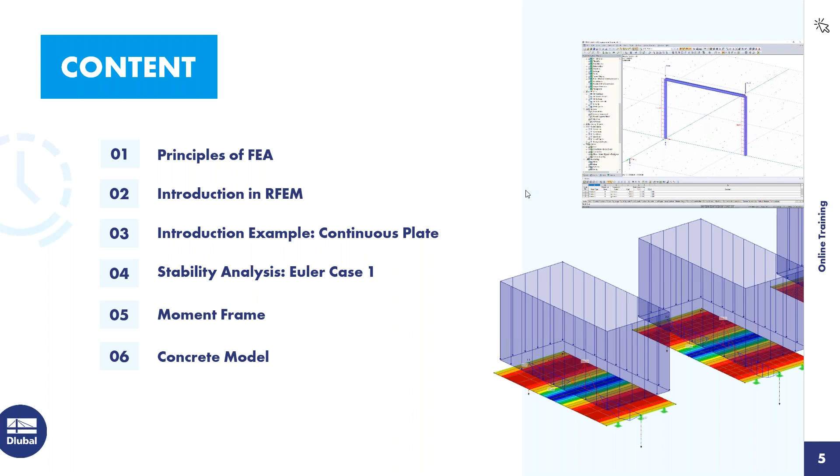So now we can dive right into the first subject, which is the basics of FEA software. When using computer software like FEA software, it is mostly and usually based on the displacement method. Another method you may be aware of is the force method, where the unknown is the force and the internal forces need to be calculated. With the displacement method, the unknown is the displacement. So to solve for this, the displacement vectors must be calculated, and then the internal forces and support reactions can be determined. The main problem today is an analytical solution can be difficult to determine with large complicated structures. So doing hand calculations for some structures with complicated and odd geometry can almost be impossible, or feel like it's impossible. The limits are being reached with large complicated structures, and it's difficult to get accurate results.

And so this is where FEA software comes in. Structures can now be modeled and converted into a finite interconnected element mesh. The material and cross-section properties are then determined or given at each FE mesh node, and the mechanical behavior is transferred between these elements. Discretization is a word that I would like you to walk away with, and this is the act of structures being submeshed into finite elements, which is done in FEA software.

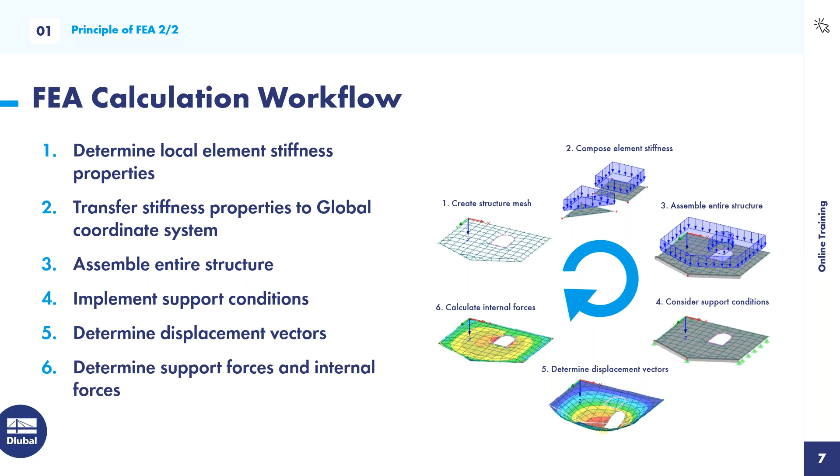So now we can move on to our example. For this example, you can see a couple of continuous plates, and then we are going to compare the moments between these plates with the continuous beam on the end, so we can get an idea of how the calculation differs between those.

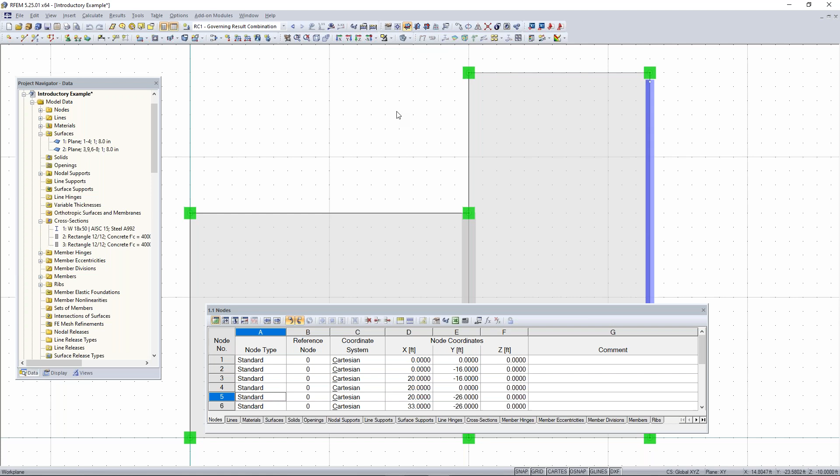We can also change the view of the model. If we go up here, you can see in this category of the toolbar we have views in the X direction, the Y direction, and the Z direction. We can also change these into the reverse direction, so if we want an elevation view of our model or a top-down view, we can choose these views.

In the project navigator, at the bottom here, we have a folder called add-on modules. RFEM is great for viewing things like internal forces, but if you want to design your structure or elements of it, you'll need to use add-on modules, which all come included with every student version of RFEM. You can play around with these; they're organized for design of different materials. You can also find the add-on modules up here in the toolbar, organized again based on design.

Next, in the project navigator, we have our display tab. This basically allows you to turn aspects on and off within RFEM. For example, we can turn off our surfaces, which just turns off the rendering and display—the surfaces are still there in the analysis, but you can turn them on and off visually. Everything is organized based on these expandable and collapsible folders, so things like loads and results can also be turned on and off.

The next tab we have is our views tab. We can create a visibility by turning visibilities on. Right now I have my members by cross-section checked, so if I turn this visibility on, only members with a cross-section of 12 by 12 will be shown—that's my beam member right here. If I turn that off, everything is turned off within my model.

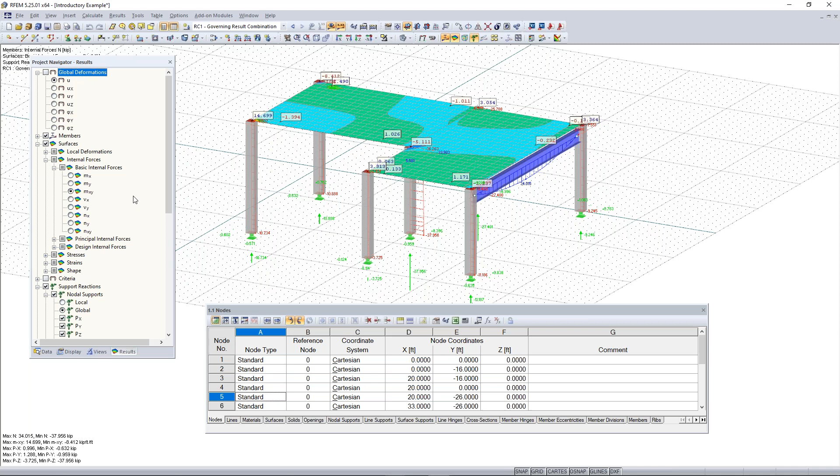The next tab, if I turn off my visibilities, is the results tab, and this is the last tab in the project navigator. If I turn on my results, the results tab will pop up here, organized similarly to the display and data tab. I'm not going to go into results in detail right now, but we will later in other examples. So I'm going to turn these off.

The last thing to go over before we hop into our example is how to navigate through RFEM. You can click the scroll wheel button to move your model around, use the scroll wheel to zoom in and out, and hold Control and click the scroll wheel to rotate the model. If you don't have a scroll wheel, you can go to the Move, Zoom, and Rotate tool—click on that, then left click to move, hold shift and left click to zoom in and out, and hold control to rotate. You can also do all of this with the arrow keys on your keyboard, which perform the same function.

Now we can open our new model to start modeling our continuous plate example. First, let's go up to the new model button—this is a way to create a new model, or you can go to File and click New. We'll go to the model name field; each model needs a name, so we'll name this 'continuous plate example.' You can also enter a description for your model, though it isn't needed—it's just an option.

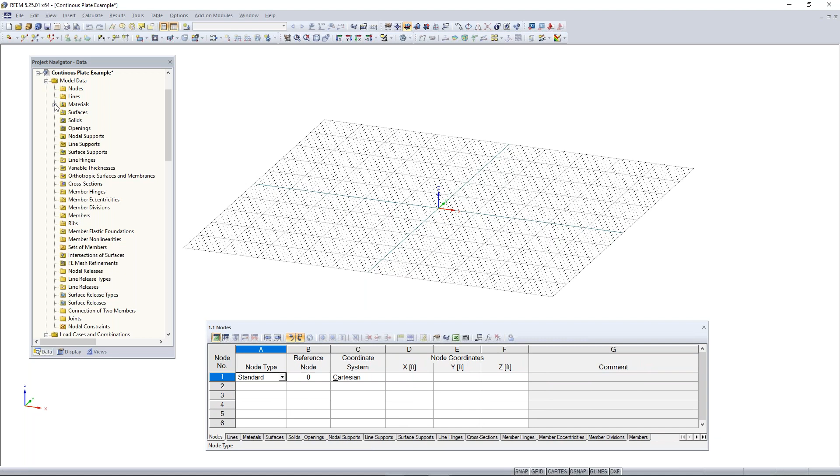The first thing you'll notice when I open my new model is my work window is blank, and my grid is here in the work window, blank and lying in the XY plane. My tables are all blank as well. Some materials have come over from previous models, but we'll delete those. The first thing we might want to do before we start with our model is take a look at our grid and make sure it's set correctly. So we have our grid points here, all distance and spaced by 1 foot, and we have about 50 points in each direction.

If we want to change the settings of our grid or work plane, we can go up here to this button and click on it, and you can see here we have our work plane settings. Everything up here we don't need to really worry about; this is if you want to change the plane that your work plane sits in, so we'll just keep it as the XY plane and model there. Over on the right hand side, we have 50 grid points in each direction, positive and negative, and we'll leave this as default. The spacing for each grid point we are also going to leave as 1 foot. So everything here is okay for now for this example.

So we'll click OK, and now we can begin with modeling our concrete plate. To model a 2D surface in RFEM is pretty simple. All we need to do is either go to the Insert menu up here, then Model Data, then Surfaces, and you can see we have a lot of different surfaces to choose from. We're just going to choose Plane, and then Graphically, and then choose a rectangular surface, since our plate today is going to be a rectangular surface. Or instead of going through this menu, we can simply go to our toolbar up here and locate the new rectangular surface toolbar button, which looks like this, and we can click on it.

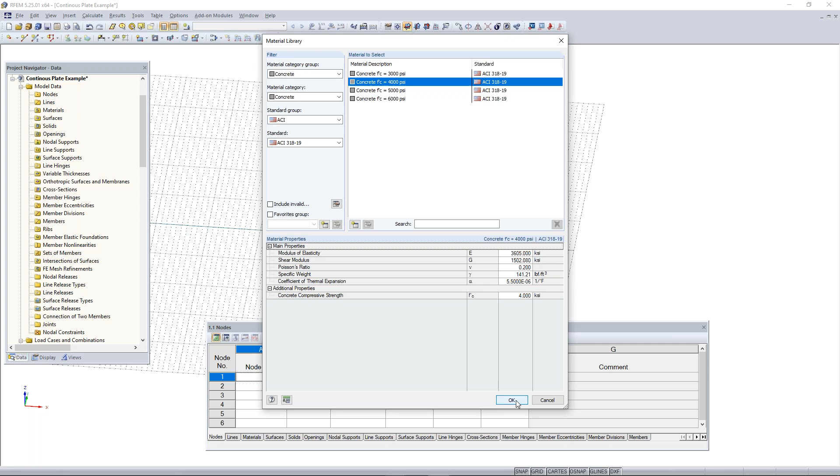Now we have our material chosen, so all we need to do is tell the program how thick we want this material to be. By default, for imperial units, 8 inches is selected. We want to increase this to 12 inches for these plates.

Then we can click OK, and now we can draw our plate. You'll see my cursor has turned into this reticle-looking cursor, and I also have the coordinates right next to it telling me where I'm located along my XY grid plane.

So I'm going to choose the origin, and then draw a 32 by 16 foot plate. All I need to do is move over horizontally 32 feet, and then move up 16 feet in the vertical direction, and then left click.

Left click at the origin, and then left click a second time to mark that second point. Then I can right click, and once I right click, that will cancel out of the tool. You can also hit escape if you like to cancel out of a tool.

Now you see we have our plate here, or our rectangular concrete surface. The rendering in RFEM is just simply a 2D element with boundary lines defined, but in the calculation the stiffness will be taken as 12 inches thick, so no need to worry about the rendering. This boundary line is always located at the center of the surface, so there will technically be 6 inches on one side and 6 inches on the other side.

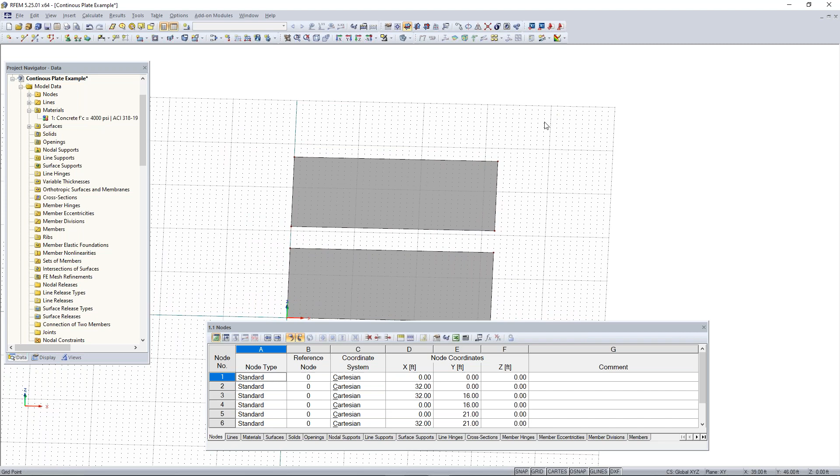Let's say I already have this surface here and I need to just duplicate it. I can simply select this second plate here by highlighting it from right to left or left to right. Then I can use the tool up here called Move and/or Copy.

This tool allows me to make one copy of the element that I selected, and then I just need to tell it which way to displace it within the plane. I can either enter those displacement vectors, or I can use this graphics tool by clicking this button, and then simply move this plate.

I'll choose my bottom point here, and then I want this bottom point to move 5 feet above where this plate is located, so that'll be this next point. I'll hit OK, and now I've made one copy of this plate and moved it that much more in the Y direction. So now we have all three of our plates here.

Since my grid is only 50 feet by 50 feet, I'm just going to highlight all of my plates here, left click, and then I can move my plates down into more of the center of my grid.

Next thing we want to do is model our beam. So what I'm going to do is create a new cross section or create a new member. To create a new member, we can either go through the insert menu or choose the button here, new single member. So I'm going to click on new single member.

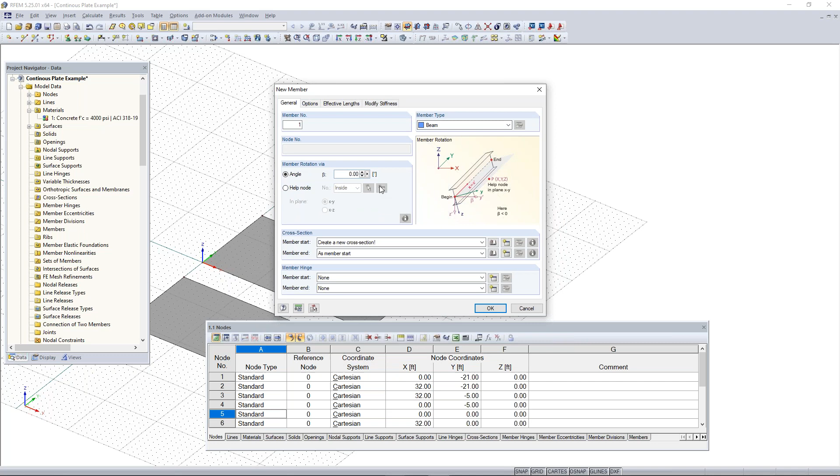Under new single member, I'm going to go to the cross-section library. This is the new single member dialog box, kind of similar to the surfaces dialog box, where we can choose our member type. For beams and columns, we want the member type beam. Then for our cross-section, we can choose the cross-section start.

We can either create a new cross-section or go to the cross-section library to choose from a predetermined cross-section shape, so I'm going to click on the cross-section library. Once that pops up, you can see our cross-section library is organized by rolled and built-up sections based on a standard. Then we have our parametric thin-walled sections, which are parametric, so you can choose the dimensions manually for each of these.

We have parametric massive, which are usually used for concrete, and parametric timber, which you can again use for timber and choose the dimensions for. Since we're using concrete for these plates here, and they're rectangular in shape, we're going to use the rectangular cross section.

Then you'll see the rectangular cross section parametric window pop up, and then we can change our parameters. So we can make the base 40 inches, and then the height we can make 12 inches.

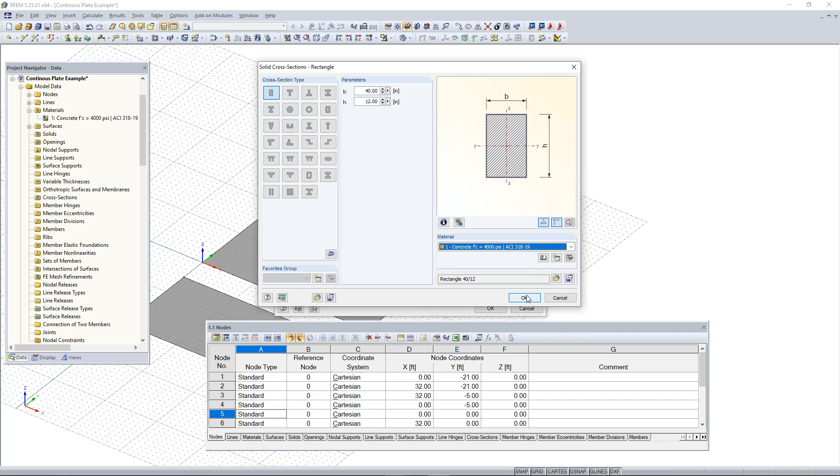Now that we have our dimensions in, we can choose our material, just like the surface. Since we already defined this concrete 4000 PSI material, we can just simply use that instead of having to go into our material library again. So we can click OK, and then click OK out of that box.

I'm just going to draw this continuous beam 5 feet above this plate, so it resembles this plate, and then we can easily compare it in results later on.

Once I draw my beam here, you can see that the rendering looks like this rectangular shape. If I change my model from a solid transparent display to a wireframe display, you can see that all members drawn in RFEM are simply 1D elements, and that's how they are calculated in the background. The shape you see is just a render over that 1D element, and all that's used is the cross-section properties and material properties to calculate the results on this member.

You can also see that our surfaces are also just made out of these 4 boundary lines, and this dotted line shows you that there is a surface made up here. Again, we can use this button up here to change the rendering of our model, and then we can move on with dividing up our lines here and adding some supports to our model.

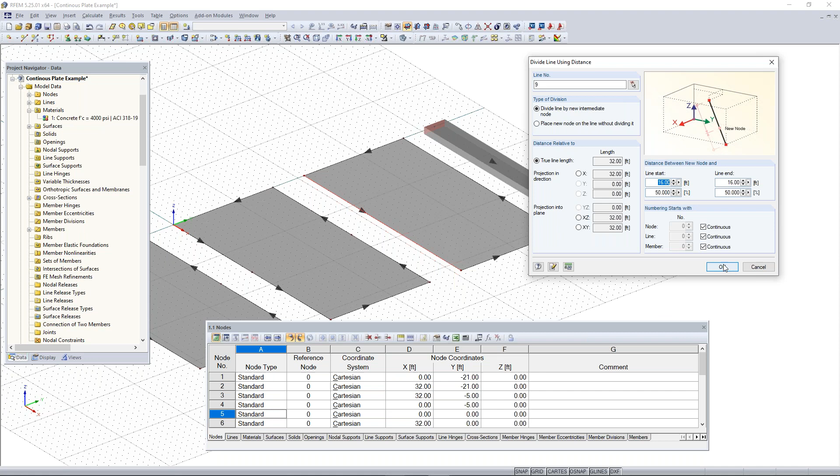We want to use the true line length, and divide this line by a new intermediate node. I'll click OK, and you can see it's divided halfway through. I can do the same thing for this last one.

Now what I need to do is divide this member as well. I can just do that using a distance halfway through, and I'll click OK.

Now what we need to do is add supports to the rest of these plates, and we need to add line supports to the center of these plates. So what I have to do is add in a line, by going up to the new line tool.

Then I can draw my line, and you can see my cursor snaps to these nodes here. So I'm going to snap to this node and then to this last node.

Then I can exit out of that tool, and instead of drawing the rest of these, I can use this powerful function where I click and select a line. Whenever you click and select something, you can hold Control and then left-click and drag, and that allows you to make a copy and drag that element wherever you want. So I'll left click, hold Control, and drag this line again to the last plate.

Now we can add in our line supports. Within RFEM, there are two different supports: nodal supports for single points, and line supports to support the entire length of a line. So I'm going to go up here to the button New Line Support.

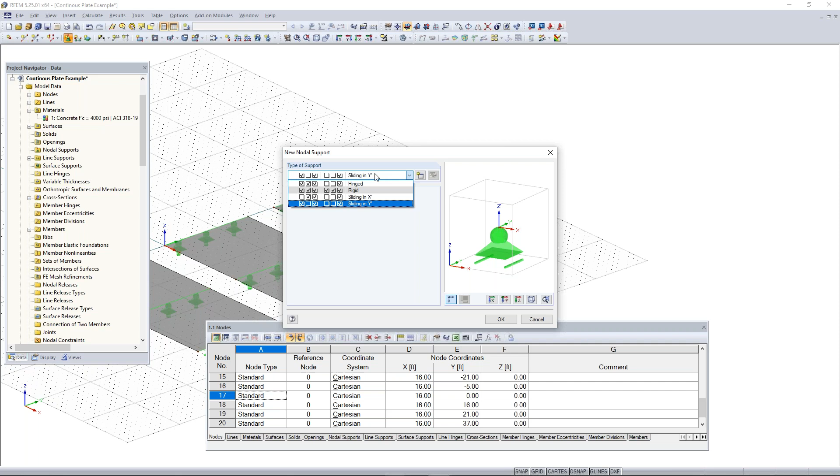For the first two supports, they're going to be hinge supports, so I'm going to choose hinged and select my two nodes here. But for the last support, we need to make this a different type of support and change the definition, so I want to create a new nodal support.

Under the new nodal support dialog box, you can see we have mostly just our support conditions here for defining our support. For this one, we want all 3 degrees of translation in the X, Y, and Z directions to be fixed. But for rotation, we want to fix the rotation about the x-axis.

The reason for this is because if we had all 3 of these supports on this beam simply as hinge supports, the beam would be able to rotate infinitely about its x-axis, causing an instability within the program. So we need one of these supports to lock the rotation about the local x-axis.

If I right click on this beam, I can show the local x-axis system by right clicking and going to the shortcut menu, then to the local axis system. Now you can see the x-axis as well. I'll right click and turn that off.

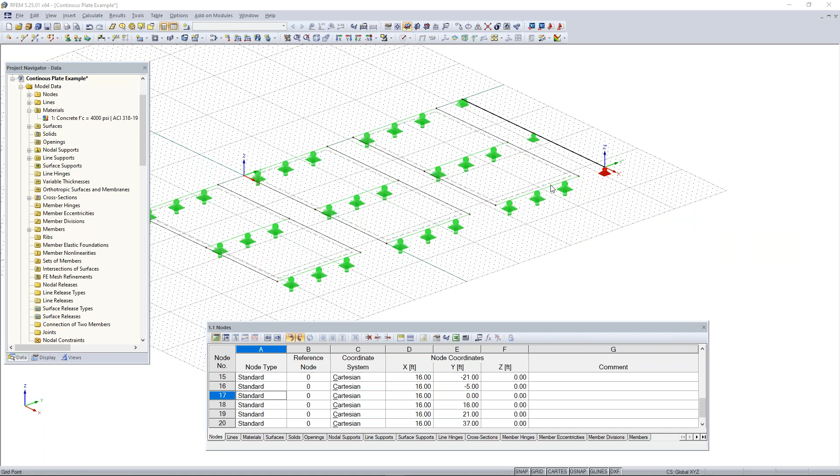Now that we have our model fully entered and all the model data created, what we need to do now is add in the loading, now that we have our supports.

To add loading in RFEM, the first thing you need to do is create a load case to assign that loading to. So we go up here to this button, new load case. Once I click on that, the edit load cases and combinations dialog box pops up. You'll see that we clicked new load case, and RFEM automatically created this first load case and assigned the action category dead to it.

What we need to do now is enter a description. We'll name this description load case 1, since we're not designing this according to any standard and the action category isn't too important right now. You can see self weight is automatically turned on for dead load. For this example, we don't want self weight activated, so I can uncheck that option. You can see the -1 in the z direction for the factor and direction is applied, which basically multiplies this factor by the self weight of the model in the downward direction to simulate gravity. We'll turn this off for now and click OK.

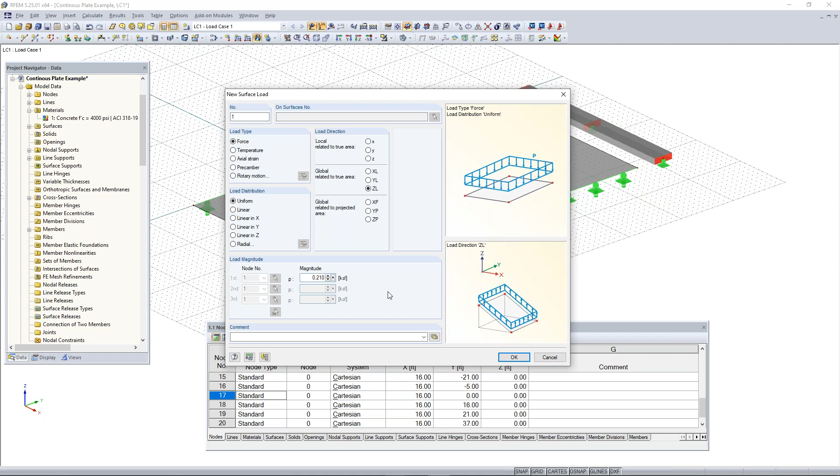For the load direction, we're going to choose the global Z direction. And then for the magnitude, we can make it simply 0.210 KSF. What we can do now is click OK.

You'll see my cursor is going to look a little different, telling me that now I can graphically select where I want to apply this loading. So I'm going to left click on my plates here. You can see that my loading is actually for gravity loads in the wrong direction, so what I can do is right click to cancel out of that load tool, and then I can just move and rotate my model.

I can drag from right to left to select my loads, select all of them, double click them, and then all I need to do to flip the direction is add in a negative sign. I can click OK, and then rotate my model back, and you can see my loading has been added.

I can also turn off this grid in the background now that we're done with modeling, to get a cleaner look. Down here are buttons used to turn off certain functions like snap and grid. You can also change your grid to a polar grid, but we'll keep it as Cartesian. You can turn off other things like guidelines as well, so we'll just turn off the grid, and now we have a cleaner look, better for presenting.

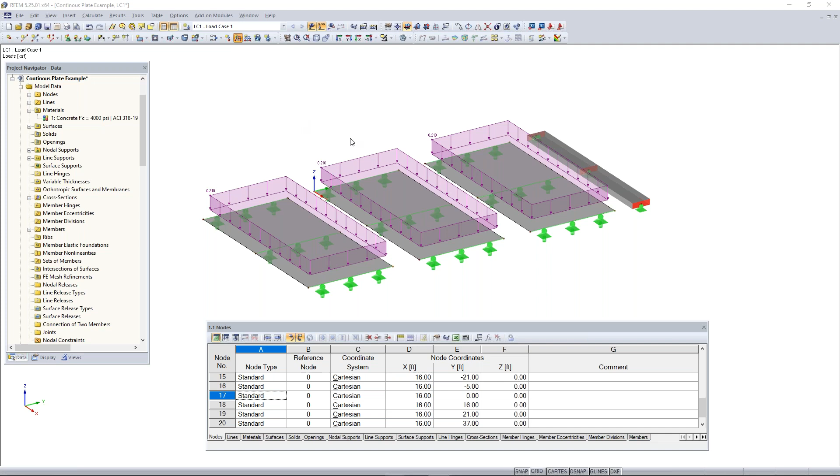This member loading is going to be the same as the uniform load or surface load applied here, just converted into a linear load. We'll keep the load type as force, and it's going to be uniform. Direction is going to be a gravity load, so global Z direction, we'll keep that the same as well. Then all we need to do is enter our magnitude, which is going to be 0.210 kip per feet - basically 210 pounds per feet.

We'll click OK. Really, we're just keeping these loads the same so we can then compare our results and see the difference between our beam here and our plates. So I'm going to change this to negative.

Now we can add in or edit our FE mesh. FE mesh for members is not too important, but FE mesh for surface elements within RFEM is pretty important - this is what you need to look out for. What we can do is go up here to calculate, and we can see what the global FE mesh looks like when we hit generate FE mesh. You don't have to do this before any calculation, but for example purposes I wanted to show you what the FE mesh looks like.

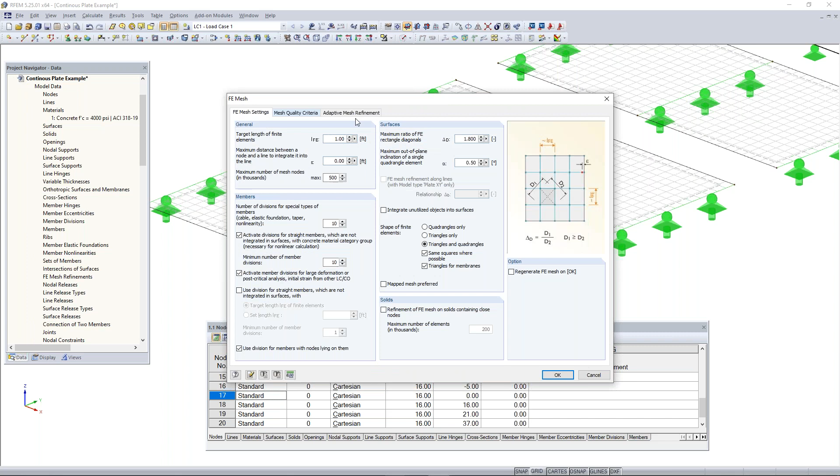It's easier to view if I turn this into a wireframe view since it's gray on gray, but you can see this is what each FE mesh element looks like on our surfaces here. If I go to calculate and then FE mesh settings, by default the FE mesh in imperial units has a target finite element length of 1 foot for each mesh element. This actually looks pretty good on our surfaces here, but for example purposes, if we needed to refine our FE mesh for certain elements, you can do this.

So what I'm going to do is add an FE mesh refinement to each of these surfaces with different lengths. I'm going to turn off the global FE mesh for now, then right click on the first surface here, turn this back into a solid transparent view, right click on the first surface, and go to FE mesh refinement, then new.

Once I do this, it's asking me to create a new FE mesh refinement definition. I'll click create new FE mesh refinement, go to surface, and make the target FE length of this refinement 0.2 feet. The global FE mesh in RFEM was 1 foot. If I need better accuracy on a smaller surface, I can shrink the FE mesh length to 0.2 feet. We'll do that for this first surface.

Now we'll do the same thing for the other two surfaces and increase the FE mesh length to see what that looks like. So we'll right click on the second surface, go to new FE mesh refinement, create a new one, and instead of 0.2 feet, we'll make this one 0.4.

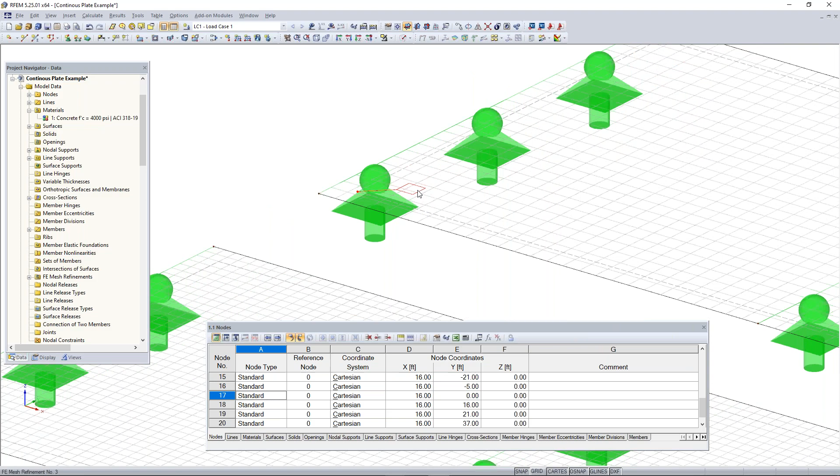Now if I go to the calculate menu and select generate FE mesh, then switch to a wireframe view and display the FE mesh, you can see this little symbol on our surface telling us we have an FE mesh refinement there, and those symbols are the same shape, easily showing the FE mesh length of the refinement. You can see the difference in FE mesh length between these plates, from 0.2 feet to 0.4 feet to 0.6 feet, giving an example of how FE mesh lengths can change across different plates.

So the next thing to go over would be the sections. We need to add some sections to our plates here.

To add section cuts, which allow us to take a cut down any section to view our results along that plane, I go up to the button define section, and hit the drop down arrow next to it for more options. I can create a section numerically, and I'll name this section AA. Once the section name is in, I want the section to go through the surface, using the via plane section type.

I can either type in the coordinates for point A to point B, or simply select them graphically using this button. We want this section cut to go directly through the center of our plate here. Next we need to choose which plane the section cut will be located in. The local positive Z axis is good, that's the local Z axis of the plate. Since it's lowercase, you can also choose the global axis system as well.

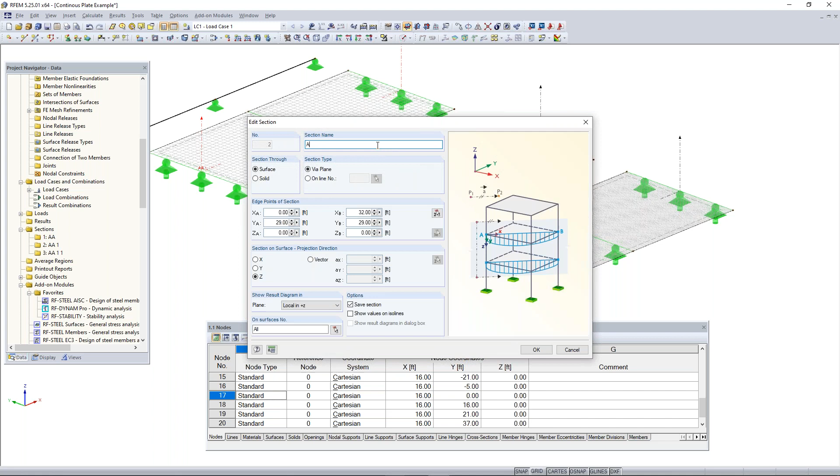Then I can change the names of these section cuts. Right now this one's AA, but these others have odd names. So I can go into my project navigator, go to my sections folder, and expand that to see the names. I can double click on one to change its name from AA to AB, and change this third one to AC, then click OK.

And then I now have my section cuts, and I'm going to turn this back into a solid transparent view. Now basically everything is ready for calculation. So I'll run the calculation, and then I think this is a good point to take a 5-minute break.

But before we do that, we can go over any questions that might be in the chat that were asked before the break here. So we can go over those and then we can go through the break.

Hi Alex, we just had a couple questions related to both the presentation as well as the model. The first common question is if the presentation today will be recorded. Yeah, the presentation today is recorded, and once everything's over and the recording is rendered, we can send it out to everyone, and you should expect that within the next day or two.

Another question is if it's possible to generate the load combinations according to a specific standard. Yeah, so if I go back to RFEM, when you're creating your model, if you want to generate your load combinations automatically when you create your first model, under the general data dialog box here, you can enter everything, and then in this little section here, you can choose from a list of standards. So we have the American standard, Canadian standard, and Eurocode. And once you choose your standard, there's an option here to create your combinations automatically based on that standard.

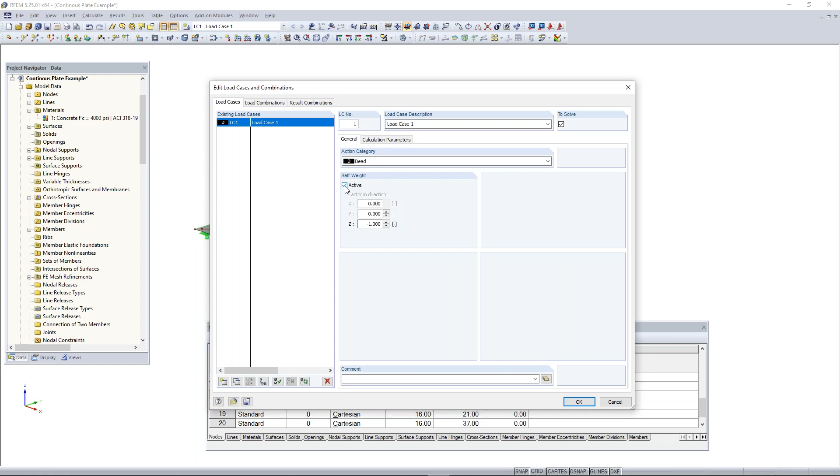But if I wanted to do that for the load case, I would just go to it and then go to activate, and this will activate your self-weight for that specific load case. If I click OK, the self-weight is now activated. If you wanted to see a graphical representation of the self-weight, or are curious how that worked, you can go to the display tab in the navigator, go to the loads section, turn on your loads, and then turn on your self-weight loading. So that's normally hidden, but if you wanted to view what the loading of the self-weight looks like, you can see that there as well.

Perfect, okay, that's all the questions for this first portion. All right, awesome, thanks Amy.

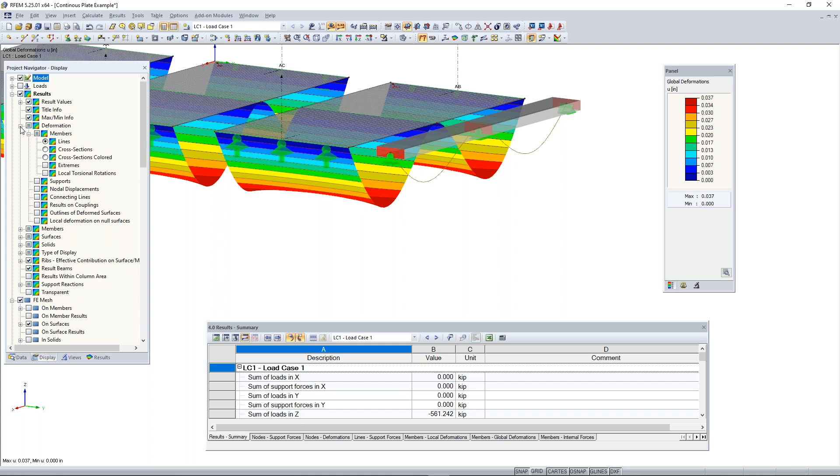But if I want to have this color coded as well, with a colored cross section, I can go to display, then go into the results here, and under results we want to expand deformations and then expand members, and I can turn on colored cross sections. Then you can see the rendered colored cross section deflection shape of our member shown as well.

Just giving a better visual of what that looks like, and you can see it's basically almost the same as the deflection for our plates. We're going to go over comparing these results in just a little bit. Then the next thing we can view, if we turn off our deformations, is the results on our single member here.

So if I check on members and then under internal forces, I can check off the option to view our axial forces. We can also view our shear forces.

VZ is for shear in the local Z axis. So if I right click and turn on the local axis system here, you can see the local axis, so we have our Z direction. This is the shear in the local Z direction. If I turn this in the wireframe view, we can get a nice look at what that shear diagram looks like as well. So that's good.

The next thing we can also view is our moments about the local Y axis. We can take a look at what that moment diagram looks like as well. Looks like we get a max moment here of negative 21 kip feet.

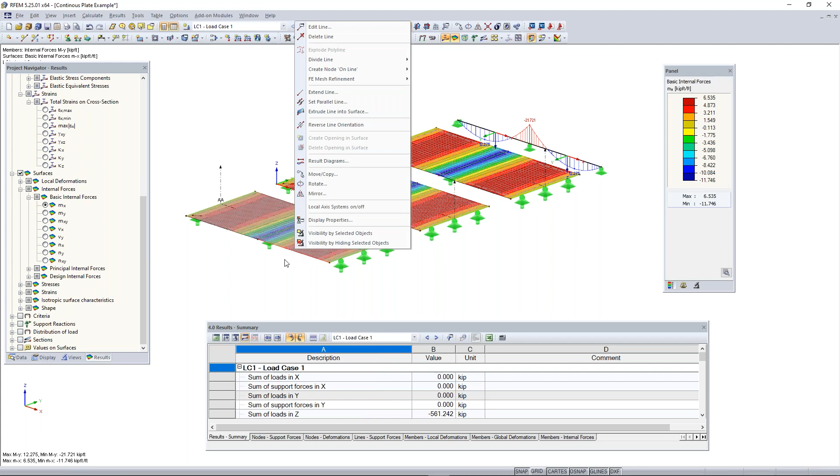By right-clicking on it and then turning on the local axis system for all surfaces, you can see what that axis system looks like. It's a little similar to the member axis system. So these are the moments along that X axis, and you can see again that it is color-coded. This panel on the right-hand side will give you your max and minimum results and that color coding as well.

You can also take a look at shear on our surfaces here, so this is shear along the X. Then we can take a look at our NX, or our N forces, our axial forces on our surface. We don't have any right now because there are no forces in that direction.

The next thing we can also look at is our support reaction. If we go down here to support reactions, I can turn that on and you'll see what those look like. The line support reactions are a little more complicated, but this is just the forces or reactions along the line here, so it's going to be a uniform reaction there.

Then we have our point forces on our nodal supports down here. We can take a look at what those reactions look like, and then we can also take a look at what our moment reactions look like as well in the Z direction.

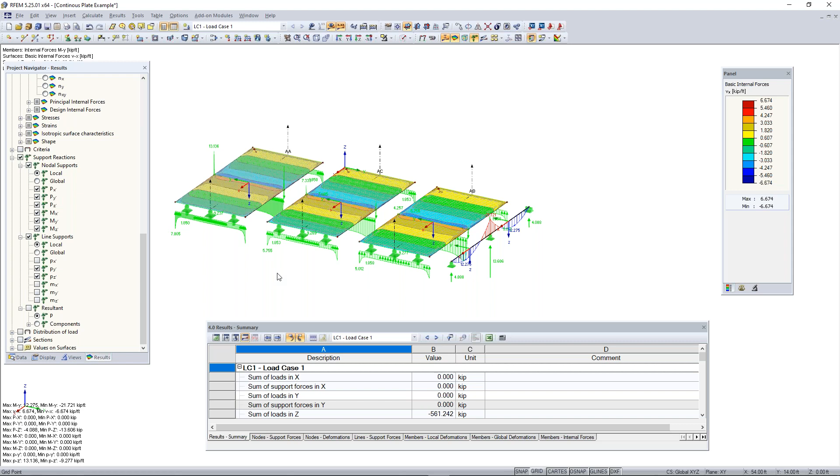So we can get a look and take a look at all of those moment reactions. And then the next thing we can take a look at is values on surface. So we can turn on or turn off our support reactions now to get a better view of the values, and we can show basically the extreme values on our surface to take a look at those forces in the surface as well.

Now that we've gone over the results, we can take a better look at the results and activate the section cuts here. So now that we added these section cuts along our surface, we can turn those on. And now we can basically see what the shear of the surfaces are with a shear diagram and that section cut plane. So right now, you can maybe get a better look at how those results differ in accuracy between these different plates here.

So that all depends on the FE mesh size, and you can see the accuracy increases the smaller your FE mesh gets. So right now we're looking at negative or max shear force in the center of our plate of negative 3.397, and this was for the surface with the smaller FE mesh. And then you can see how that changes by just a little bit, so negative 3.397 and then negative 3.398, depending on the size of your FE mesh.

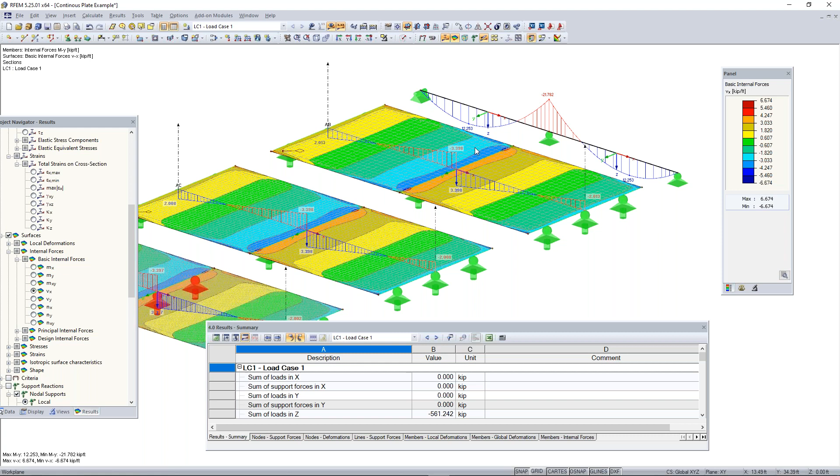And so right now I just want to go back to the PowerPoint so we can go over and compare some plate theories. So if I hop back to the PowerPoint, then we can go over plate theory. So to help understand these plate theories, I will use beam element theories as an analogy.

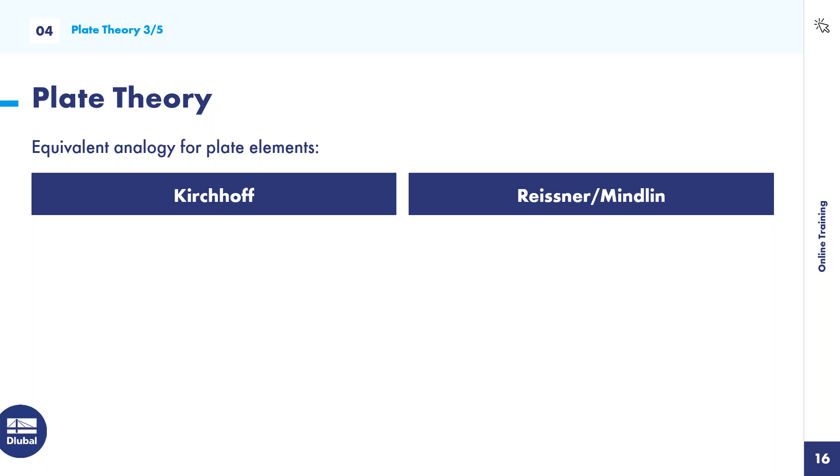So a similar theory to Bernoulli's, but for plates, is the Kirchhoff theory. And then a similar theory to the Timoshenko theory is the Reissner-Mindlin theory, which works for plates as well. So here are the assumptions.

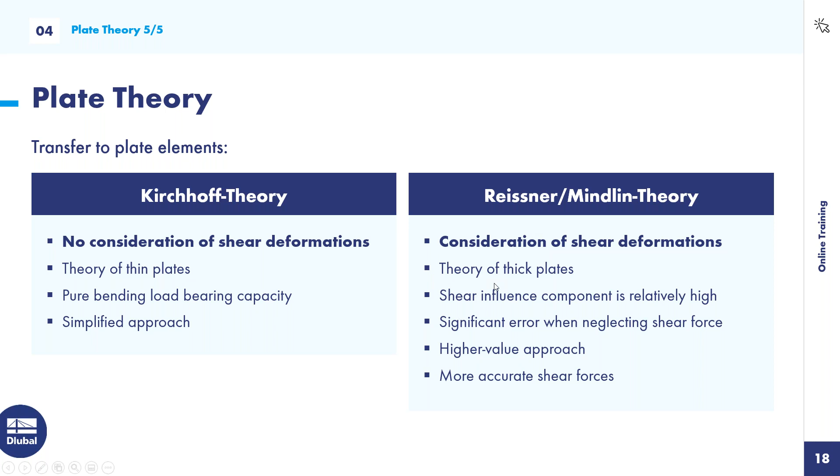So now we can switch back to RFEM, and then we can take a look at where we can change those two theories within the program. If we go up here to Calculate, and then go to the Calculation Parameters...

We can see under the Calculation Parameters, under Global Calculation Parameters, we can go down to Plate Bending Theory, and you can see we have Mindlin and then Kirchhoff. So this is where you can change between the two theories. And again, this option up here, Activate Shear Stiffness of Members, is kind of switching between the two - Bernoulli's theory and the Timoshenko theory.

So if you wanted to compare your hand calcs from school to the calculations within the program, and you're seeing different deformations for your members or for your plates, the issue could be that you're assuming infinite shear stiffness when in reality the shear stiffness is limited. So turning off this option would yield the same results.

So then if we turn this to the Kirchhoff theory and hit OK, we would have to rerun our results so we can see what those look like. And once those results run, it should be pretty quick.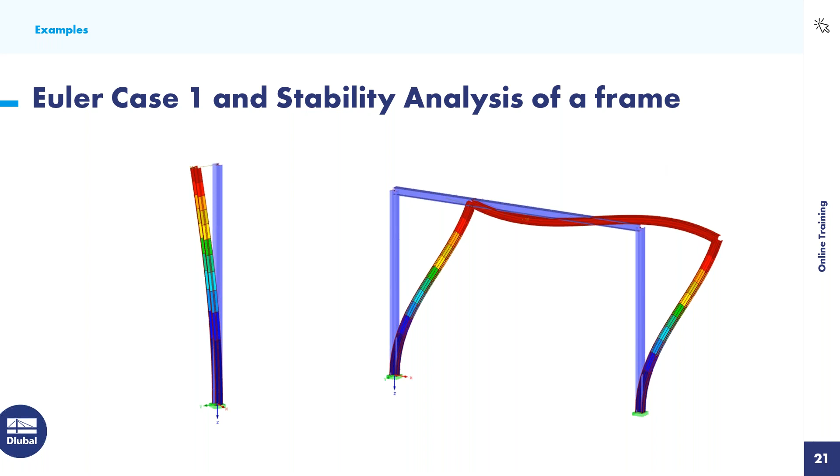So what we can do now is hop back to RFEM and begin with modeling that example. First thing to do is go to the new model button, and we can name this model the Euler case 1 example. We don't need to give it a description, and then we can enter the type of model, 3D. We don't need to model it according to a standard, although I will do that for this time, just to show an example of how that works.

So I'll just choose the ASCE 7-16 and choose the option create combinations automatically, and then everything else we can leave as default, and we can click OK. Again, everything will reset, the grid will reset, we'll have a blank grid here, blank tables, and we can start by simply modeling this example.

The first thing we need to do is create a new member, so I'll go up here to new single member. And then under new member, this is going to be a W shape, so we need to tell the program what cross-section to make it, so we'll go to import from cross-section library.

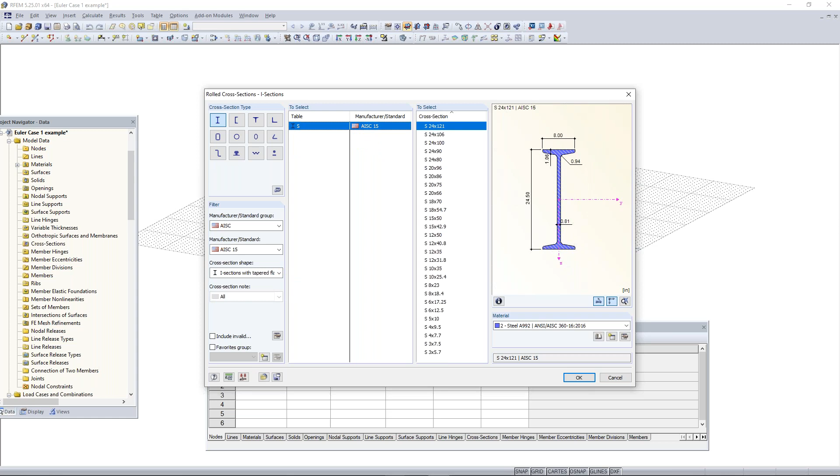So for this example, I'll just choose the AISC, and then I'll choose the latest standard, 2015. I want I sections, and then actually I want wide sections, so I'll go to my W sections here, and then for this cross section, I'm just going to choose a 12 by 35, so I'll scroll all the way down.

And the material for this I section will be steel A992. Again, you can choose the material for your members by either entering or creating a new material, or we can go to our material library here. Like I said, you can also create a new material if you know the material properties to enter. And now we can click OK.

Once we have our cross-section and material entered, we can click OK again. This member is going to be a column member.

I basically want to draw this column out of plane, and there are a couple ways to do that. I can change where my grid lies in my work plane by going up to the XY plane, and choose to change this to the X or YZ plane, or the XZ plane. To draw my column vertically, I'll select the origin, left click, and draw it 30 feet up. Now my column's drawn.

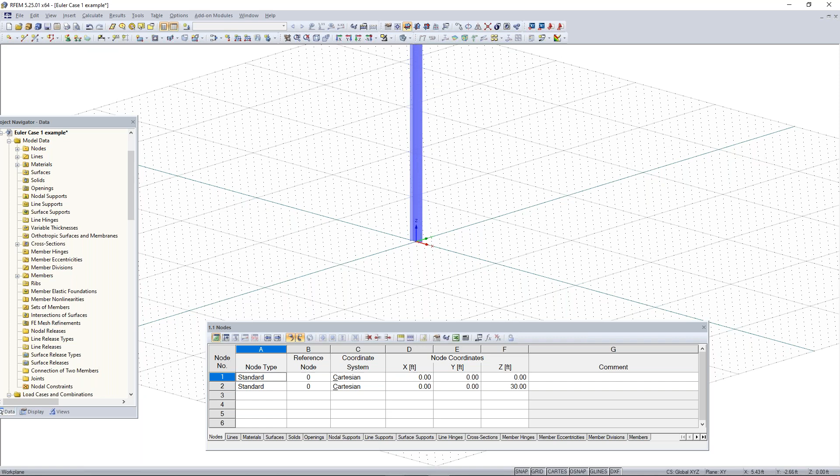Something to go over real quick is highlighting things within RFEM. You can drag from right to left or from left to right, and this will only select objects fully engulfed within this box. If I drag from left to right, only my node is being selected, but if I drag from right to left, anything touching this box will be selected. So now both my node and my column are selected when dragging from right to left.

This is helpful because if we go to new nodal support, and instead of hinged we choose the nodal support hinge or rigid, now all 6 degrees of freedom are selected. I'm going to click OK.

Then what I can do is just drag from left to right, and now you can see that only selected my node, and it also added my rigid support to the node there. Now you can see we have our column fully supported at the bottom.

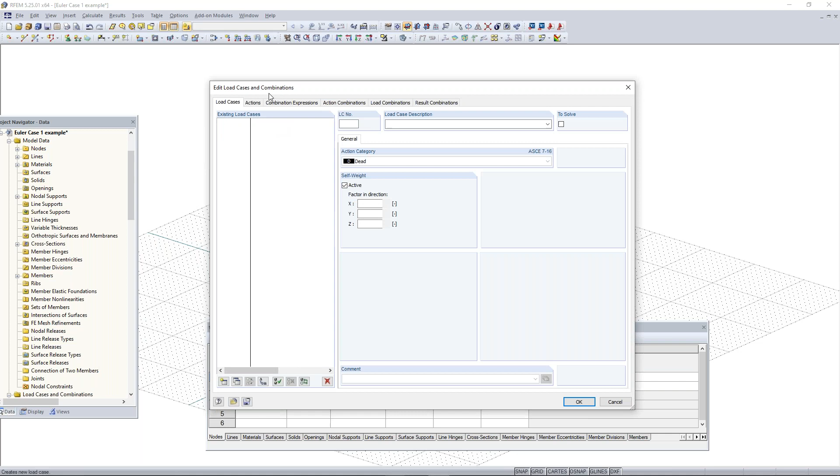Now we just need to create our loading. I'm going to go up to my new load case button here to create my new load case. I'll click on that, and the edit load cases and combinations dialog box should come up. You can see again our dead load case is automatically created. I'm just going to name this one test, and we also want to turn off self-weight again for this example.

I'm going to click OK, but I did want to show you that our load combinations are then generated automatically. We only have one load case, so we'll only have one combination for LRFD and ASD, but you can see how that works when you have other load cases with different actions. We also have our result combinations that take all of the load combinations, create an envelope solution, and show you the max and min results. That's just a quick overview of how creating those automatically works. We only need one load case for this example, so we can leave all this the same and click OK.

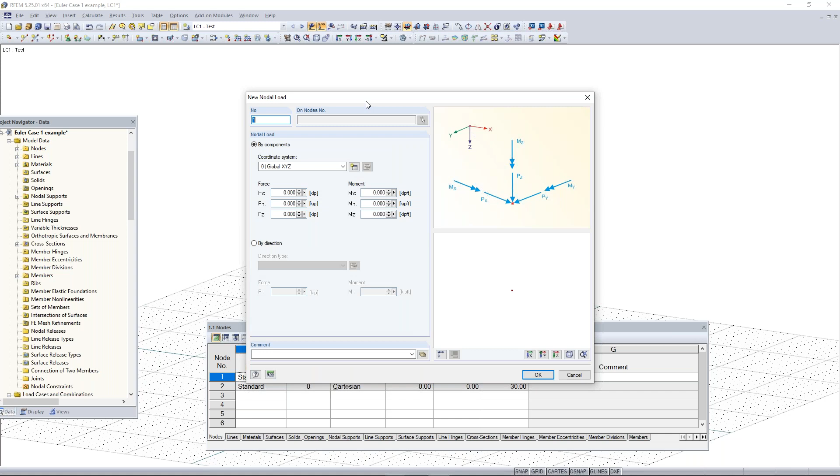The next thing we want to do is add a load to the top of this column here. For this one, we're only adding a point load to this node right here, so I want to go to the load tool, new nodal load. Once I click on that, the dialog box will pop up to use this tool. It's pretty simple - you can just add in your forces in either the X, Y, or Z direction, or add in your moments about the X, Y, or Z axes.

For this, we just want to add in a negative load of -5 kips, and then a lateral load in the X direction of 2 kips. You can see what that looks like on the right-hand side here, and what that is going to look like on our node.

So I'll click OK, and then I can either select the node and left click on it, or I can highlight it and add in the loading like that as well. So I'll right click, and now you can see if I rotate, we have our column here with our lateral loads.

And gravity load here at that single node at the top. Now I do need to show you something pretty important. So if I click on calculate all, and again, this is actually going to run through our load case, load combinations, and result combination.

I'm getting an error for very high deformations, but what we can see here is our global deformations. So right now, if I look at this in the elevated view, and I'm just going to turn off my tables and grid, you can see that we're getting a max deflection in the x direction of 3.782 inches.

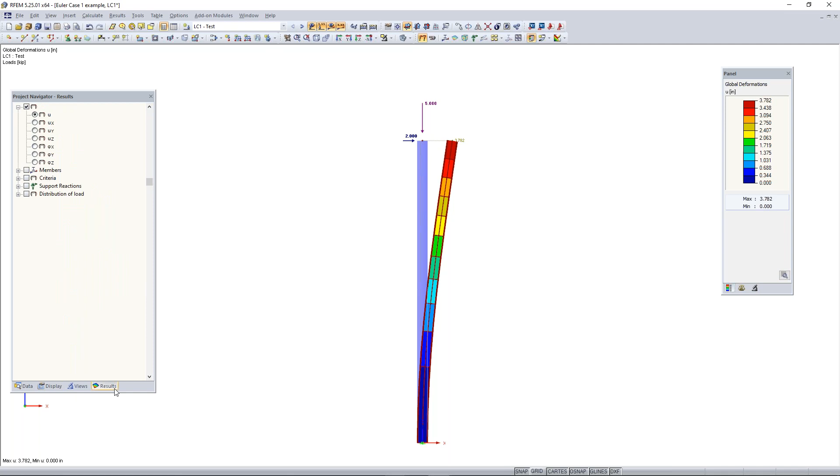We can also take a look at our member internal forces. So if I check on members, and then I take a look at the MY results, the moments about the Y axis, you can see at the bottom here, at the support, we're getting a max moment of negative 60 kip feet. Try to keep those results in mind.

This is basically, for load cases, a linear calculation or first order calculation, and I want to show you how this differs from a second order calculation.

So now I'll go back to the load combination and load case window. If I go up here to edit load cases and combinations, and then we go under our load cases tab. Under our test load case here, we can look at the tab called calculation parameters.

Everything else, we mostly just want to look at the method of analysis here. By default, load cases in RFEM are calculated based on a first order analysis, and load combinations are calculated based on a second order analysis. So if we look at this right here, this load case is being calculated by a geometrically linear analysis, and we can change this first order linear analysis to a second order analysis.

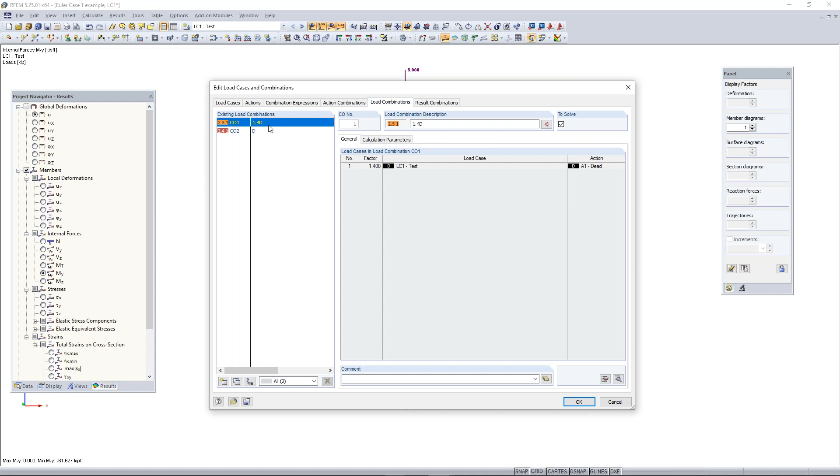And if we take a look at load combinations and go under the calculation parameters for these, these are always run as a second order analysis by default as well. So just keep that in mind when checking between first and second order analysis.

Another thing to note is that members within RFEM are determined to be a beam or column based on how the loads are applied. So in this case, we have a column here because of the axial forces applied to the top. RFEM decides if this is a column or beam based on the axial forces applied to the member.

Next thing we want to do, for this example, is to change the loads to only 100 pounds in the axial direction. So what I can do is drag from left to right and then change the loads by double clicking on them.

What I want to do is change this from -5 kips to -0.1 kips or -100 pounds. And then I want to change the X direction, or the lateral forces, to 0. So we'll click OK.

Then what I want to do is open the RF-STABILITY add-on module. So let's say now we want to run a stability analysis on this structure here. Again, in the project navigator, you can scroll down and find the list of add-on modules.

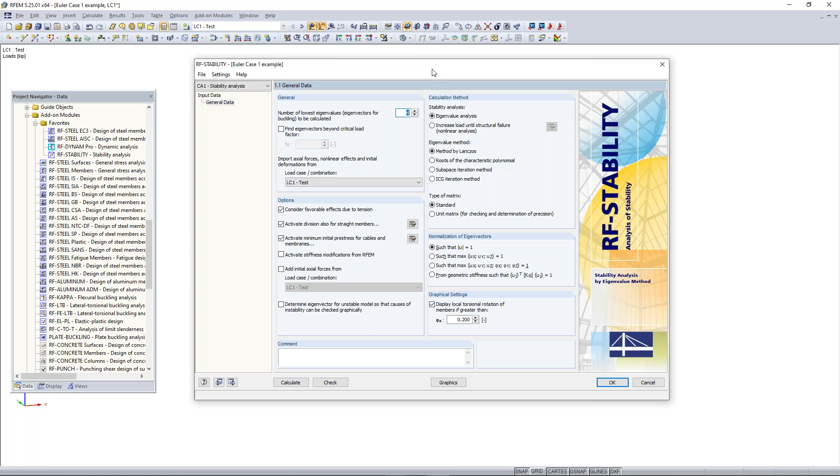So once the add-on module pops up, this is what it looks like. It's basically just a dialog box within RFEM, and all of the information from your structure in the background is taken into account within this dialog box here. And what RF stability does is it uses the help of eigenvalues and different eigenforms to perform a stability analysis.

So quick background, Euler was a mathematician who came up with different cases to show the critical load factors as well as critical loads and lengths. And this is something that just every stability analysis does.

And so the first thing we want to do within this add-on module is we want to make sure that the division of straight members is activated. That's always activated by default here, the division for straight members. And what we want to do is go into the edit FE mesh settings for members here.

And then under the minimum number of member divisions, this is only set to 2. For this example, we just want to, or for your members, you want to increase this to 10. This is important and just increases the accuracy for your members, or for the division of your members, which is mostly how the program meshes everything in the background.

So we'll click OK. And then the next thing we can do is up here, we just want to make sure that we're choosing the right load case. So we're going to run the stability according to load case 1 here. You can also run your stability analysis according to a combination as well.

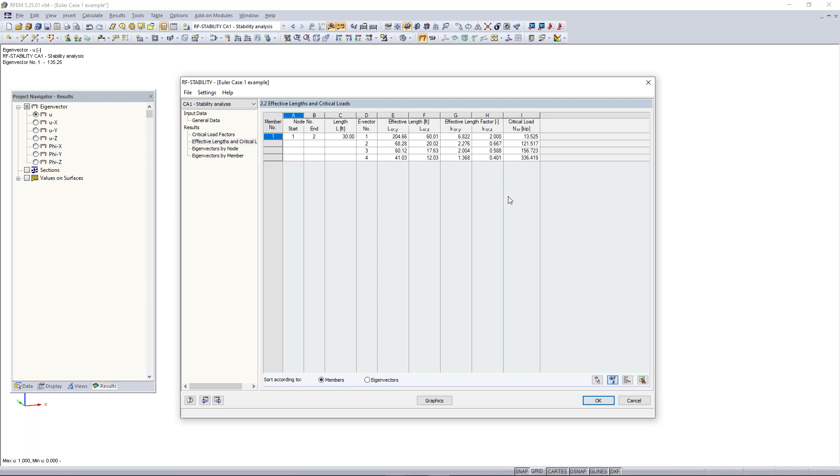And then we also have our effective lengths and critical loads here. We can view our effective lengths for our member here and our critical load as well. And we can view this information graphically.

So if I go down to the graphics button, we can then take a look at our eigenmodes graphically. So with our cross-section color turned on, we can go over here to our panel and we can go under factors, and get a better look at our buckling form for our first eigenmode.

And we can also scroll through to our second buckling form. And then we can look at our third and then also our fourth. So our fourth one, you can see here.

And I think it's clear from this first one, the first buckling mode, that the column will first be unstable in its weak axis direction. The weak axis of this column is in the y direction, and that's about the local z axis. So if I turn that on again, you can see that will be about the local z axis.

And the reason for this is pretty simple, because the moment of inertia for this W shape is the lowest about the z axis and highest about the y axis. So it makes sense why it will deform in that direction first.

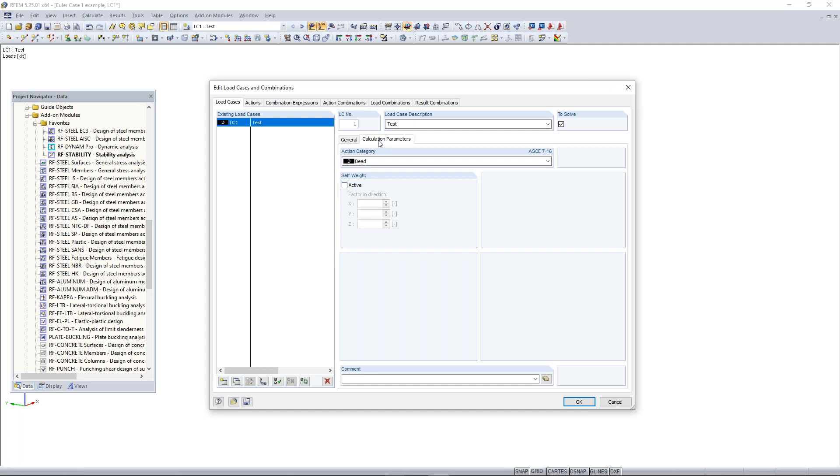Right now we have P-delta turned on, meaning we're taking into account second order effects. So to run a stability analysis, we need to make sure this is set to a linear analysis. I'll click OK, and then go back to RF stability.

Under RF stability, we'll again set our load case to our first load case here. Make sure it's not a second order case, it doesn't have any second order effects to it, because if it does, we'll get an error within RF stability. So we'll run the calculation.

Now you'll see that our first critical load factor in our first eigenmode is lower than 1, which is not good. This means our structure can only take around 96.6% of the loading that we applied to it, which is not good—it means it's unstable. This is how you can check if your structure cannot take the loading you applied to it. You want to make sure that all these critical load factors are above 1.

We'll click OK, and again, if we go to graphics, we can take a look at what those eigenvectors look like.

Now I'd like to go back to the PowerPoint, and I have another question to ask. This is a true or false statement: the critical load factor specifies which factor can be used to increase the stiffness until the structural system fails. I'll give you guys about a minute to answer in the question section, and then I'll look and see what the majority of the answers are, and we can go over them.

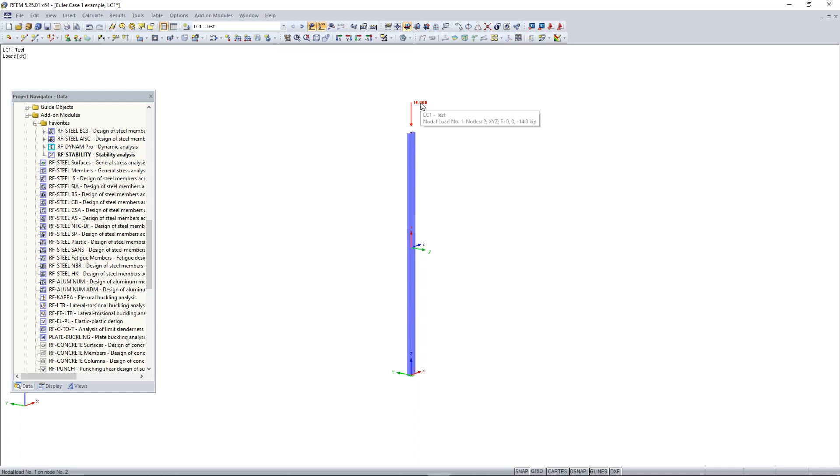So then we can turn these results off, and we can show the loading again for our load case 1. Right now we have negative 14 kips applied for our gravity load.

So if we change this to something smaller, like negative 5 kips, and then just to reinforce, if we run these results and go to our stability and calculate, we should see again a critical load factor above 1 for a more stable model, so 2.

So now we can move on to creating a moment frame out of this column. If I turn off the results and turn my grid back on, we can right click and turn off the local axis system. Then I take this whole column, highlight it, hold Control and make a copy of it 10 feet away. So now we have two columns here that will act as our moment frame.

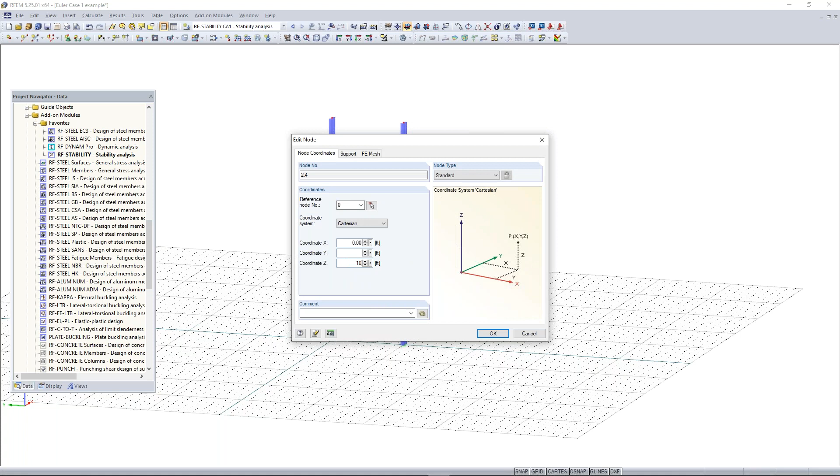Another thing we can do is shrink the height of these two columns at the same time by highlighting only the nodes at the top of them and double clicking on them. Then we can shrink this down to 10 feet. And now we have two columns here, both 10 feet high.

And we can simply just draw the beam at the top here to connect them. So we'll go to our new member, and create a new member to act as our beam. This will open our cross-section library, so we'll go to I-sections again, and under I-sections we can go to W, and scroll down to something like an 8 by 15. We click OK, choose the same material, click OK again, and then we can simply connect both of these columns here for our beam.

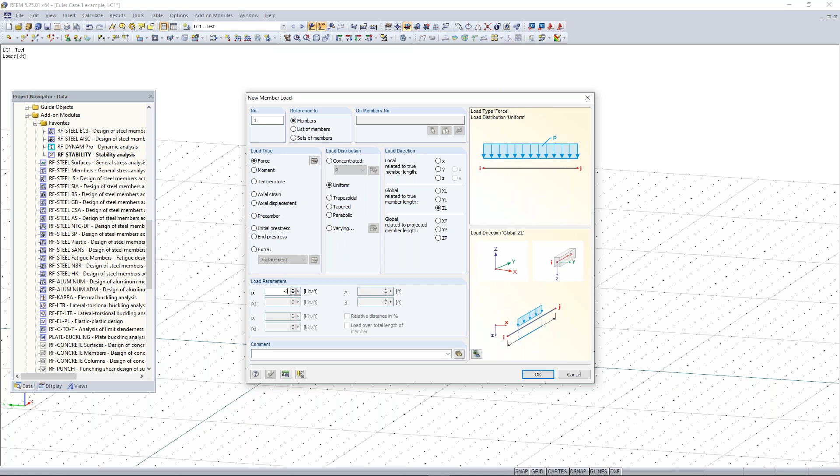The next thing we want to do, now that we have our moment frame, is add some loading to the top. So we have our loads on our columns, but we want to add some loading to the top of our beam. To add in the member load, we click on new member load, choose force uniform, and for load direction we'll choose the global Z direction. Then our magnitude down here will be something like -3 kip per feet. We click OK, add in our load, and choose our beam. So now we have -3 kip per feet applied to the top of our beam.

So now if we run our calculation for this, and actually hit calculate all, it will calculate all of our load cases and even the results for our stability, which makes it easier because now if I go to my drop down here again, I can see my load cases, load combinations, and result combination. I can go to RF stability.

Then in the panel, under the factors tab, I can take a look at the eigenvectors here or the eigenmodes. So I can cycle through them and we can see our critical load factor here is 20, so that's good. Then we can see each of our eigenmodes for this simple moment frame. We can also see that our third eigenmode is warping or deforming out of plane here.

So let's say we wanted to make sure that normally our moment frame would stay in plane, or have some type of support at the corners. I'm going to add in some supports here at the top of the corners by holding Control and selecting both of my nodes. This is another way of adding supports. We can double click on the nodes there, go to the support tab, choose available, and hit create new nodal support.

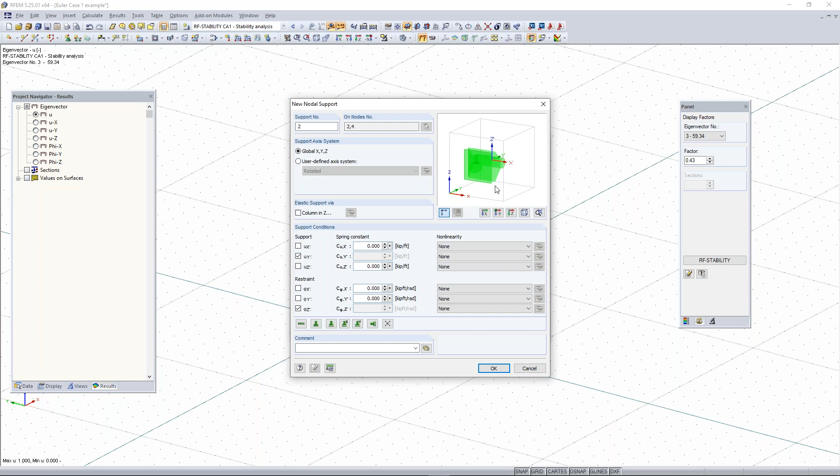Under this, I can choose to have those two supports be able to move in the X direction and the Z direction, but I don't want them to move in the Y direction. Then I'll unlock all rotation, click OK, click OK once more. Now you can see those supports are added, and that they cannot move in the, actually we wanted these not to be able to move in the X direction. So let me change that real quick.

So then we want to change this to the X. Now if I click OK, these supports at the corners here are preventing the frame from moving in the X direction, but it can move laterally in the Y and then up and down in the Z.

So if I hit calculate, or hit calculate all, the calculation will run, and then I get my results for our stability. I can look at my eigenmodes here, and now you can see that all of them, especially this third one, are staying within this YZ plane, and we are getting good critical load factors. So that's how to create the simple moment frame from that column we had, and also how to run a stability analysis on your models.

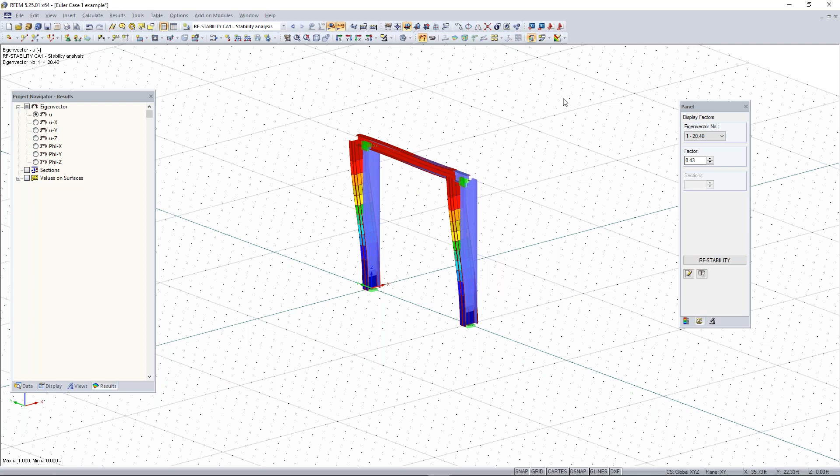Yeah, we do have a direct integration method with AutoCAD. If I go back to RFEM, you can import models in from AutoCAD, things like center lines, imported as a .dxf file. If you're integrating line elements like center lines, that works great. You can save the cross-section name and material to those lines in the layers in AutoCAD and have those come over as members.

Keep in mind, members in RFEM are only 1D elements, so within AutoCAD you need to make sure to have the center lines for the members, because that's the most important thing to import over. If you just have the actual shape drawn, like the perimeter lines or boundary lines, then all those lines will be imported but you can't really define the cross-section onto them.

With AutoCAD, surfaces are possible too, but they have to be defined as 3D faces to be imported over. If they're defined as 3D faces, they can be directly imported into RFEM, but if not, only the boundary lines of the surface will be imported, which isn't too much of an issue—you can use tools in RFEM to create those surfaces from the boundary lines. Most importantly, for members you want center lines, and within the layers you can define or have the cross-section and material data imported over as well.

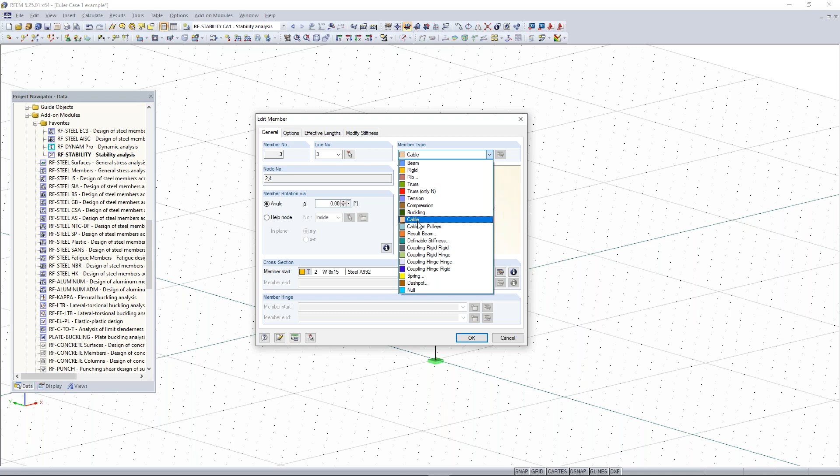If I double click on one of these members, this is a good subject to go over member types. Within creating or editing a member, we have different member types. Beam members can take tension and compression forces, and you can edit the member hinges for the start and end of the member. We also have cable member types—cable members basically only can take tension forces. They cannot take compression forces, just like a cable in real life would act, and you can't edit the member or end conditions of them. This member type will fail when it takes compression forces, and then it'll be able to take tension forces.

Also, the calculation method for cables would be large deformation analysis, so it is possible to run that. I'm not sure, maybe Amy has some more insight on this as well.

Cable elements can be modeled within RFEM, as Alex mentioned. Automatically, the program will default to the large deformation analysis because cable elements are a little special—the higher the tension force, the increased stiffness of the cable. It's important to know that if you use this cable element, you need to model it with the catenary shape in RFEM. If you prefer not to do that, you can draw it as a straight line and use the RF form finding module to apply a pre-stress force, a sag, or a target length, and the program will come up with the catenary shape for you.

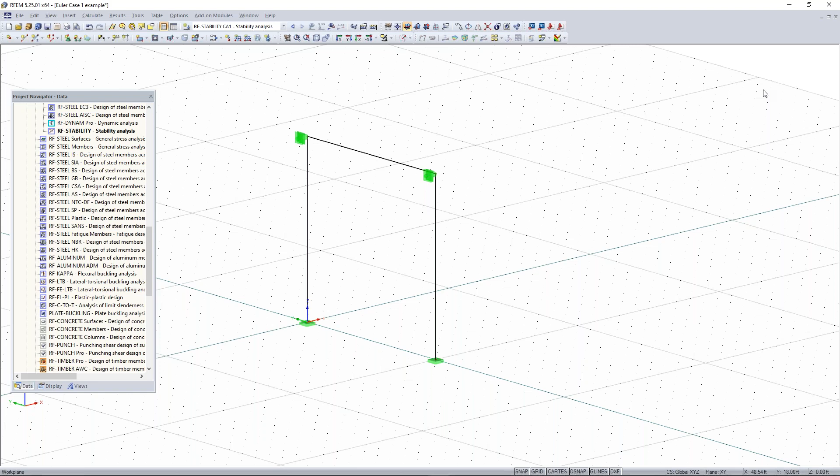The final question is, if we use two members as one metal column, like a built-up column, can we use RF Stability the same way? If you have two members modeled separately but forming one continuous column as will actually be constructed in the field, RF Stability will behave the same way. It may not necessarily change the mode shape depending on whether the member is broken into two separate segments. Hopefully that answers the question.

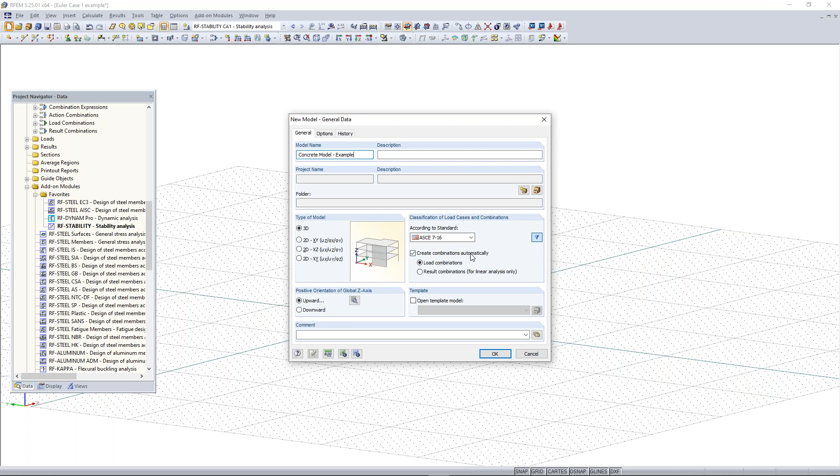So let's hop back to RFEM, and within RFEM we just need to create a new model. Within the new model general data, we can name this model Concrete Model, and we'll name this Example. For this model we'll keep it as 3D, and we'll create our combinations automatically again. So we can click OK.

Our blank model will pop up here, and we can begin by modeling a concrete surface. We can go up here to New Rectangular Surface, and for this one we're just going to use the material 4000 psi according to the ACI. Also, the thickness of this surface is going to be 8 inches. So we'll click OK, and then I can left click on the origin, and then drag out my surface.

This surface is going to be 46 feet by 40 feet. So we'll go up here and set it to 46 by 40. Then we can go up to our toolbar and click on the button called Show Whole Model. We can also choose the Reverse Z Direction so we can get a top-down view of this.

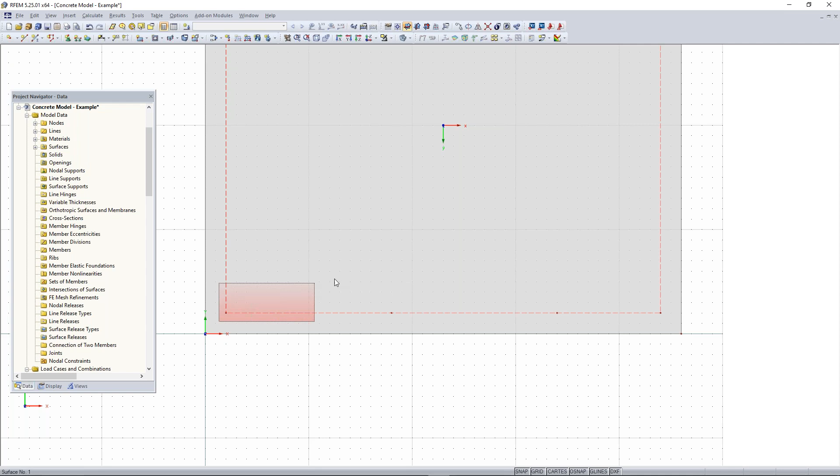Since this is our floor slab, we want to create the outline for the walls on the outside here. We can use our divide line tool and divide this line graphically. The wall on the left-hand side is going to be 12 feet, right in line with this column row. The wall on the top is going to be 28 feet, right in line with this column line row.

So now we can proceed with going over how to model the spiral staircase on the outside here.

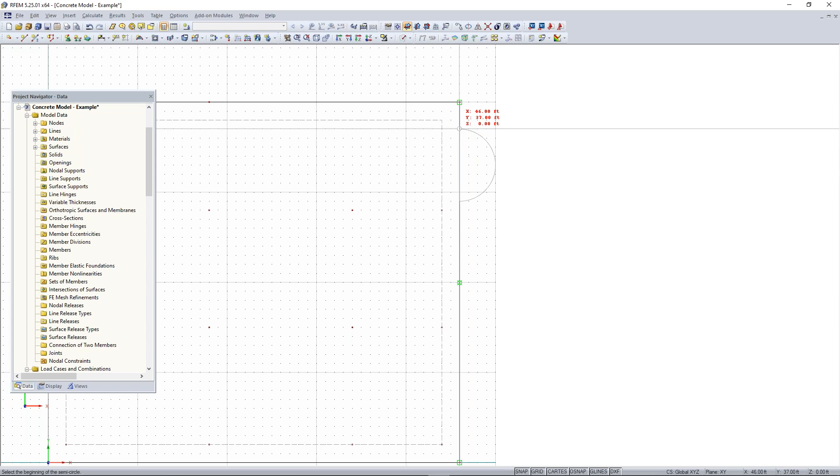Then I just need to select the center of the semicircle here. I'm going to move down 7 feet, which is going to be the radius from the top here. If I select that, then select my center point and the point on the corner there, now you can see we drew our semicircle.

Once we have that done, we can move on to creating our ceiling slab. We'll take the floor slab here, and since it's the exact same geometry as the ceiling slab, with 12 feet of distance between the two, all we need to do is create a copy of our floor slab.

We can use the move/copy tool and simply make one copy of this. The distance between the floor slab and the ceiling slab is actually 11 feet, but since the center axes of the surfaces are halfway between the actual thickness of the slabs, we need to take this into account. So we take half the thickness of the floor slab and half the thickness of the ceiling slab and add to 11 feet, which comes out to about 11.83 feet. We'll move our floor slab upward 11.83 feet, click OK, and now we have our floor and ceiling slab.

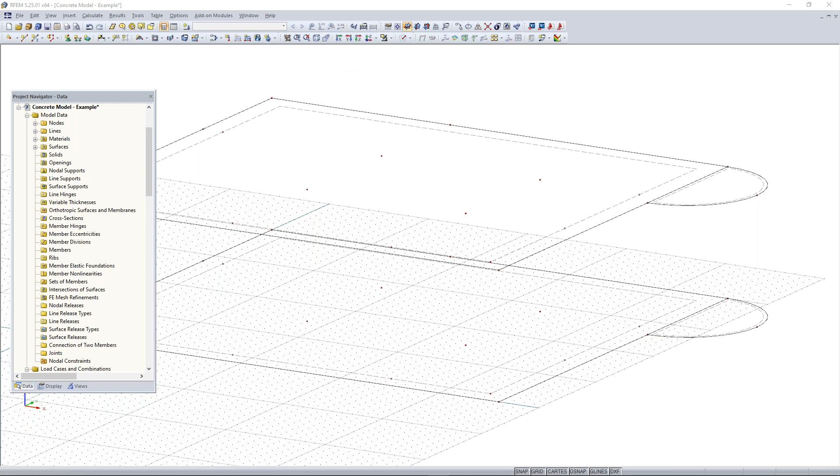Now that we have both our floor and ceiling slab, we can take a look at it in our isometric view. We can have that view predetermined, and also get a top-down view. If we look from the top down, we can't see both the floor and ceiling slab, so we can turn this into a perspective view, and now we can see both. This helps get a better view of how our model is going to look.

So we can now divide our lines here. We need to put a circular opening in our slab at the top. You can see that line number 10 here, if I right click and show numbering, we can see the numbering of our lines, nodes and surfaces. Line 10 is one long line, so we want to break it up into two different lines at this intersection point at node 40. To do this, we use the connect members tool, to connect lines or members.

I'm going to select that, then drag over node 40 here, and now you can see the line was divided between line 10, and now we have line 16. Now we want to divide line 16 by a distance of 7 feet. I'll right click on line 16, go to divide line, then distance, and divide this 50%, or 7 feet from the start or end, doesn't matter. We click OK, and now we have our center point, with line 16, 17, and line 10 again.

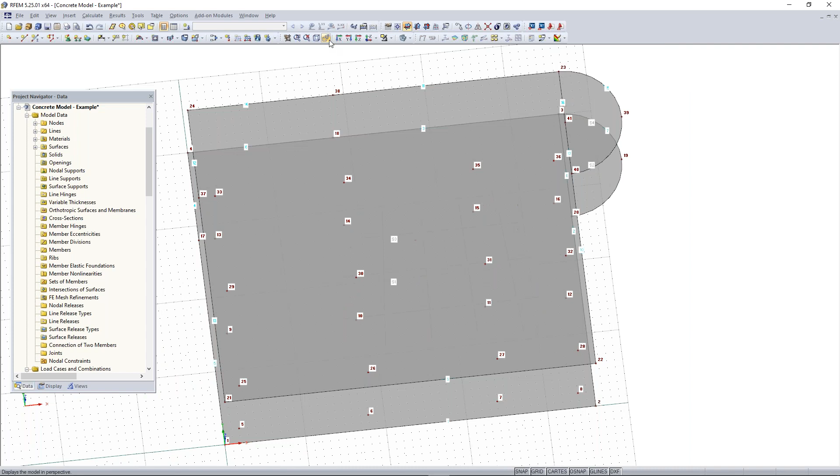And now we can simply just delete. We can take this also out of perspective view and put it back in isometric, and we can delete our two different surfaces here. So we can delete our surface there and then our surface here. And we also want to delete our lines 16 and 17 here.

One way to do that would be to go to the project navigator, and you can go under the lines folder. This is just another way of deleting or editing lines. So I can hold Shift and select both 16 and 17 and then hit delete on my keyboard.

And now we want to redefine our surfaces. So this is one way. If you're importing surfaces in from AutoCAD, you may just get the boundary lines only. So if you need to redefine a surface based on boundary lines, you can do that with a tool up here next to the surfaces tool.

If I hit this drop down arrow, I can go to select boundary lines, and then I can keep this. I want to change this thickness from 8 inches to 12 inches for our ceiling, for the ceiling slab maybe. And then the material we can keep as concrete, and we can keep the stiffness as standard. So we'll click OK, and now all we have to do is choose our boundary lines. You can see now we have one large surface for our ceiling slab.

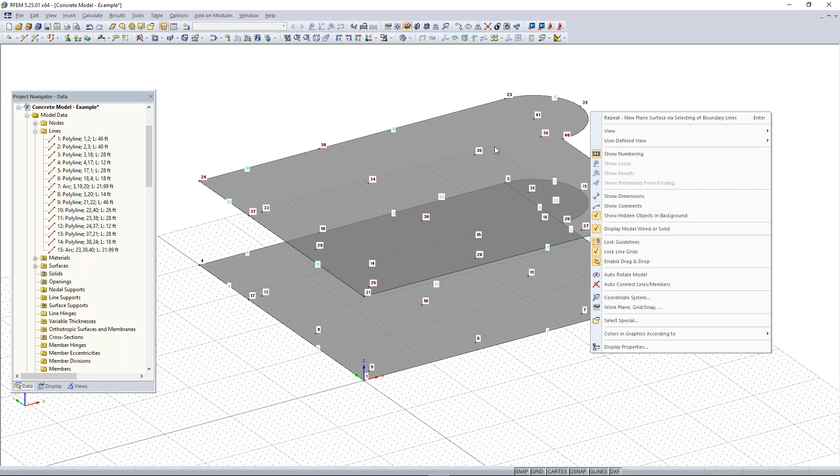Now we want to create an opening in our ceiling slab right here where our staircase will go. So for this, pretty simple.

To create openings within a surface in RFEM, there is the opening tool here. So we can go up to openings, and then we can choose rectangular, we also have some other ones like semicircle, but we want to choose the circular opening. And then we can simply just choose node 41 for our center node here. This circle is going to have a radius of 6 feet.

You can see I can either choose this graphically. If I want to choose this graphically, I should define a step and change this to something like 1 foot. Now I could easily change or set the radius to 6 feet, or I can also drag my cursor into this box here, highlight the parameters and change this to 6 feet and hit enter. Now you can see if I right click to cancel out of that tool, that we have our circular opening here, and that will act as the opening for our staircase.

So now the next thing we want to do is define our walls on the perimeter of our model here. We can change this into an isometric, and we can rotate the model and take a look at the side where our staircase is. Then the next thing we want to do is create a wall right here.

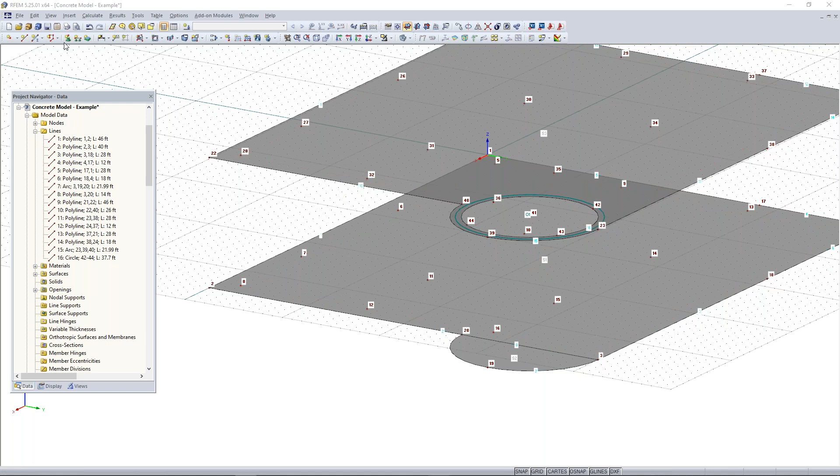But first we need to define some lines to act as our boundary lines. So we're going to draw a line that's going to be 7 feet from our node 20 here. That will be at the coordinates 46, 19, 0. So if we go to 46 and we go to 19, we can select this, and then we can draw our line here all the way up to our ceiling.

You can see that we have the snap function that shows you that you're drawing perpendicular to the top surface up there. So if I left click, then you can see that now our line has been drawn and it's perpendicular to both our floor and our ceiling slab.

And now I can just draw another line on the other side to define our second wall here. This one, I need to draw a line from 12 feet from node 3 here. That's going to be at the coordinates 34, 40, 0. So let's go 34, 40, 0, and then I just want to draw this line all the way up to the ceiling slab. You can see again, it snaps perpendicularly to the top there.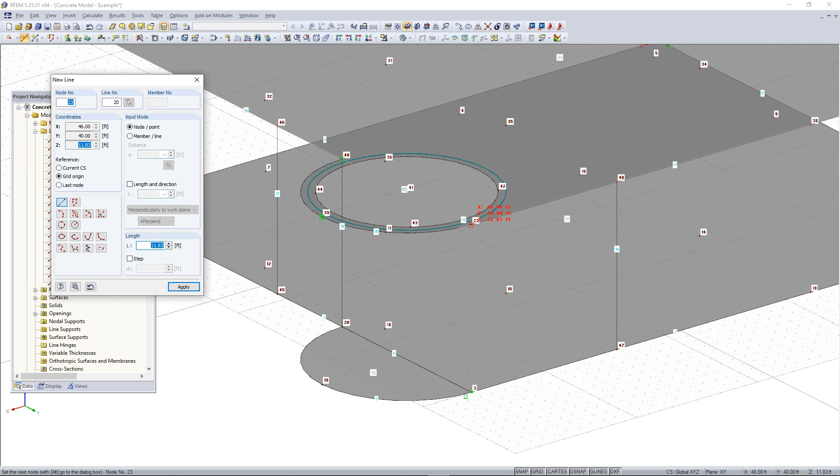Pretty easy. Then I can right click, and now all we need to do is connect nodes 20 here to node 40, and then 3 to 23, and then 18 to 38, 4 to 24, and then 17 to 37. So now we have all of our boundary lines basically for our walls.

So all we need to do now, one last thing to do, is we need to make sure that these lines where our vertical lines here connect are all split up throughout our model. So what we can do is use the connect lines or members tool here to connect those lines and split all of them up. I'm just going to highlight the whole model, and now you can see these lines here are split up and connected.

Now what we can do is create our surfaces. Also, there's an option where if you right click and go to this option called auto connect line/members. I have this turned off, but if you have it turned on, anytime you connect a line to another line, it will automatically split the line. But with it off, you can do this manually using the connect line/members tool.

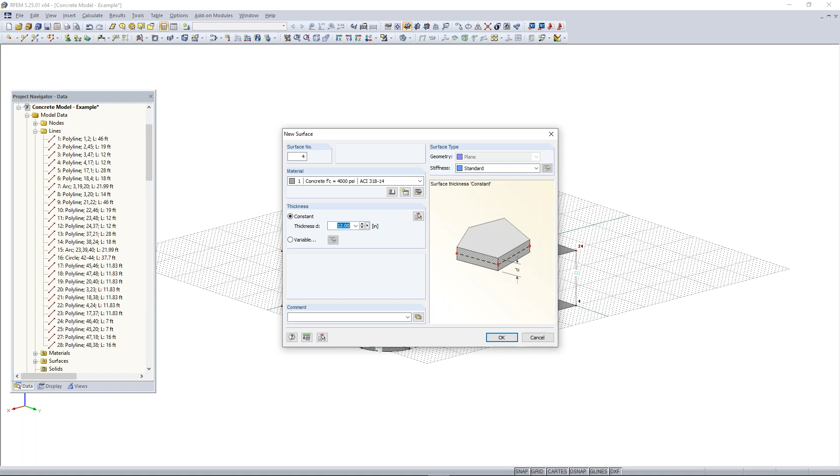Now we want to create our walls here. Again, we can use the new surfaces via boundary lines, and these walls are going to have a thickness of 8 inches instead of 12. So we'll change that and hit OK. Then I can simply go around and select the boundary lines for our walls. You have to make sure you select these in a chain operation, so if I choose this line, I can't choose the line up here. I have to make sure I go around so they're all connected.

Now you can see we have our flat walls, and now we just need to create our curved wall. To create curved surfaces that don't lie in a single plane, if they have 4 boundary lines, you can use the new quadrangle tool. If I go up here to the tool, we can select the quadrangle tool, general 4-sided surface. I'll click on that, and you can see we can choose the thickness and the material. I'll click OK, and then we simply choose the boundary lines of our surface. Now you can see we have our quadrangle surface.

So now we have basically all the walls to connect our floor slab and our ceiling slab. We're missing one more in the center, which will be our load-bearing wall.

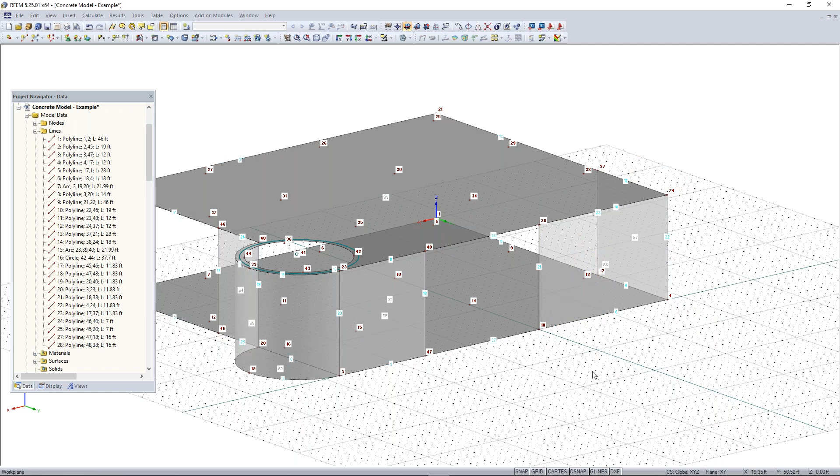So what I need to do now is change the origin of our work plane to node 18. To do that, you can go up here to this button called Set Origin of Grid/Work Plane, and then select node 18. Then I can change my work plane here to the XY or YZ plane, and draw a new rectangular surface. I'll click OK, then select node 18 and node 34, and now we have our new wall there. That'll be our load-bearing wall in the center.

And we can move on with creating our columns now.

So for the columns, there are different ways to create these. We could just use the new member tool. Also, another way to create members would be to just draw the line first. So if I go to create new line and connect nodes 5 to 25 here, I can take this line and double click on it.

Then I can go up to, we have a couple different tabs up here. You can add supports and FE mesh. We can add a member to this line, so I'll click available. This will bring up the new member dialog box, and from here I can treat this line as a new member and give it a cross section and material. So I'll go to import from cross section library.

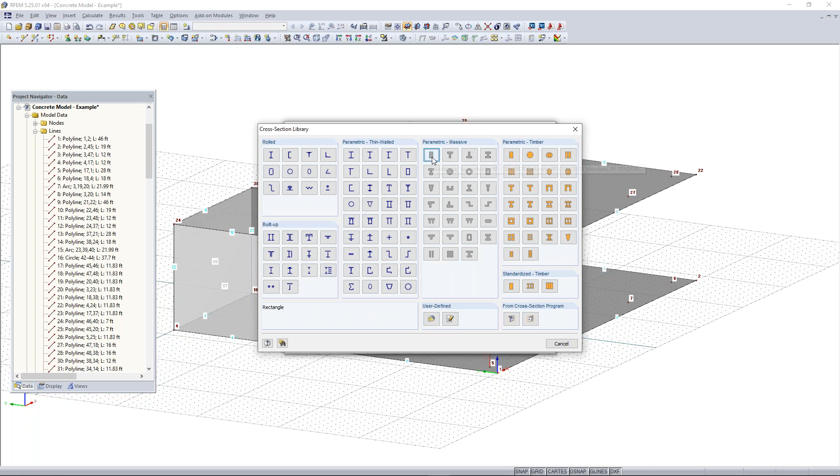Once that comes up, I'll go to my parametric massive sections, then type in the dimensions for the column. These columns are going to be 12 inches by 12 inches, and the material is going to be concrete 4,000 PSI. So now we can hit OK, and you'll see the cross section pop up here. We can hit OK again, one more time, and now you'll see that our line has turned into this 12 by 12 concrete cross section.

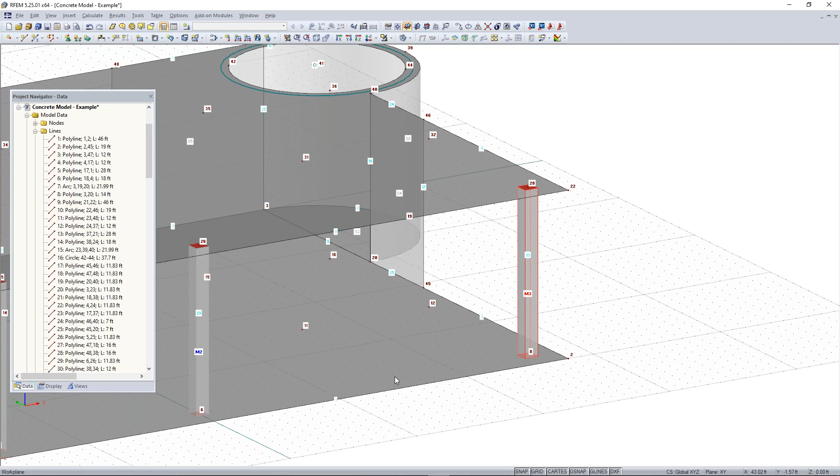So now I just need to take this cross section and add it to the rest of these nodes. I can do this by holding control and dragging this over to create a copy. I'll hold control and drag that one over, then undo that. Let's try that one more time. Select this column, and now we have our row of columns here. So now we just need to make a copy of this row of columns. Another way of selecting elements within RFEM is you can go up here to the select special button.

We can use this to select different categories. Let's say for these columns, I just want to select members. I'll activate members, then choose on the right-hand side which type of members I want to select. I'll choose cross-section rectangular 12 by 12, and those are exactly my columns. I'll click OK, and now you can see it selected all of my members with that cross-section.

So what I can do is just hold control, then left click and drag, and now you can see that I made a copy of my rows there. That's just an easy way of modeling the same thing. Then I just need to add one more column to connect node 15 and node 35, so I'll make one copy of that. And now we have all of our column members.

Now I can just create a new member again, so I'll go to import from cross-section library. Once that opens up, this downstand beam is going to have some different dimensions compared to our columns. This beam is going to be 12 inches by 12 inches.

And it's also going to be a rib element. So if we go to our member type here, we want to change our member type to a rib type. Basically for rib type members or beams, if we go to edit member type, you can see that for a rib there are two different integration widths on each side. This is going to integrate into our ceiling slab here, and we can have our beam drop down and be on the positive side of our slab according to the local z-axis of the slab, so you can see what that looks like. We can also choose the width of each side, and for this example we'll have it be L/8, that'll be the length or width of each side there, and then we can click OK.

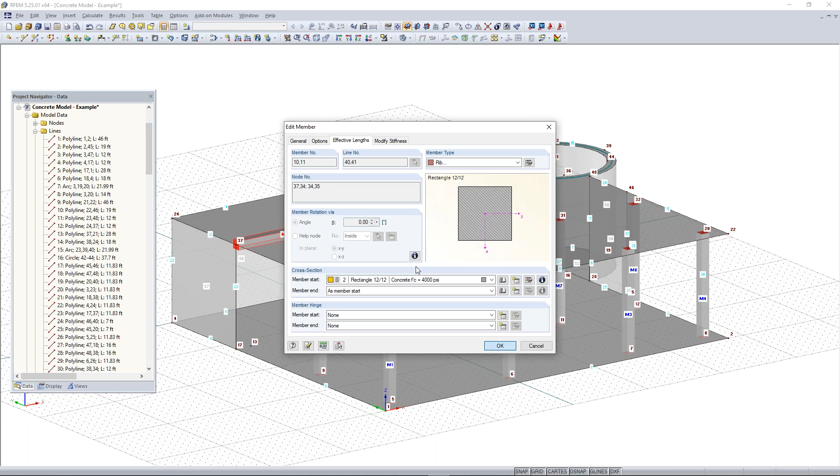So then we can draw our beam here and connect it to our load-bearing wall, and then connect and draw it to our column. Then we can just simply hold control and select both of our members here, and change our member type to rib, and again redefine those parameters here. Our rib will be on the positive side for the alignment, and our integration widths for side 1 and 2 will be L/8. We'll click OK, and then you'll see that the program will drop this part down with an eccentricity, and the integration widths are there, but they're just not rendered.

So now we have our downstand beam, and the next thing we can do is add in our last opening to the back of our model here. This will be our opening window into this wall, and this one is going to be 9 feet wide and 5 feet high, located 3 feet above the surface axes there. So what we need to do is change the plane from the XY plane to the XZ plane, and then change our origin to the back corner here. Now we can draw our opening.

So I'm going to go up here to rectangular opening, and again this is going to be 9 feet wide and 5 feet high. We want to start drawing it right here, and that'll be the first corner, then we can put the last corner, and that'll be right here — 4 feet, 8 feet above. And now we have our opening.

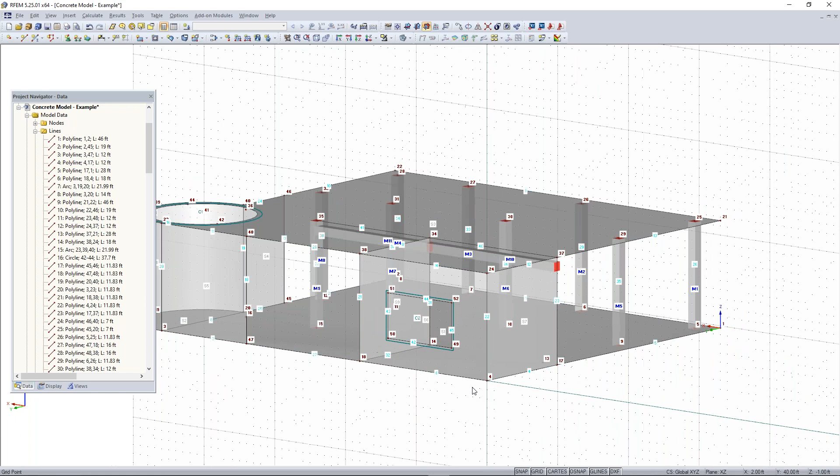Now that we have almost our whole model created, we just need to add supports to it. We can add supports to the left side here, so we'll go up to new line support.

We're going to assume that the foundation of this building is adjacent to another one, so we want this line support along this whole entire length. We also want to make sure it's defined correctly, and this side is only going to be supported in the vertical direction, so we want to take away translation. If you check something, that means it's fully fixed; if you uncheck it, that means it's not fixed at all.

If something's partially fixed, you can add spring constants as well. For this condition, it's only going to be fixed in the vertical direction, the X and Y directions will be released along with the rotation. We'll click OK, and then click OK again, and now you can see we have our line supports there.

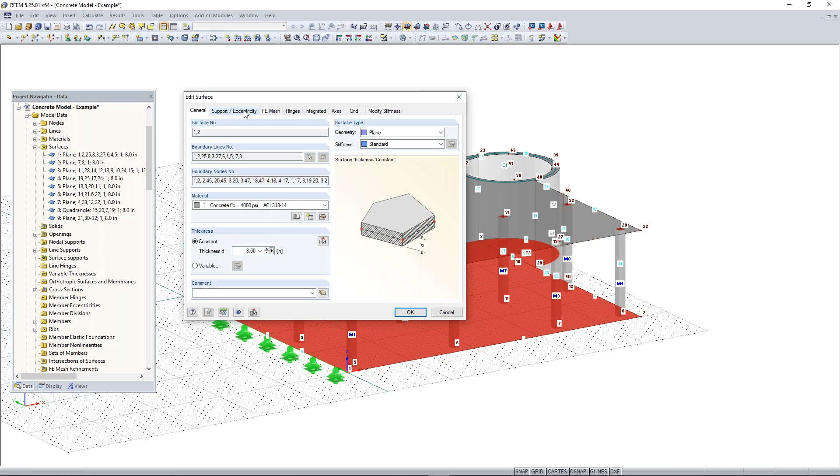We also want to add in some surface supports, so we want to put those on the whole entire foundation slab here. We can go to surfaces, choose surfaces 1 and 2, and go to edit. This is another way to choose surfaces within the project navigator and edit them. We can go up here to supports, and we want to check off available.

For this support condition, we want to make it partially fixed. For this model, we'll assume the foundation modulus is 640 kip per cubic foot, and we'll assume that it is non-linear. So you can make a surface or support non-linear.

What this means is you can choose that if there's negative contact stress in the local Z direction, then the support will fail, or the opposite, where it fails if there's positive contact stress in the local Z direction. For this example, we're going to choose negative contact stress, meaning if the surface starts to lift up from the supports, or deform upwards, if there's uplift, then those surface supports will fail.

But if there's compression, or if the surface pushes down on the foundation, then there will be support for it. That's what this means for the vertical direction. For shear, we're just going to enter some parameters for the spring constants, since it's not fully fixed in those directions. We'll do the same thing for the shear direction, type in some values for the spring constants, and click OK.

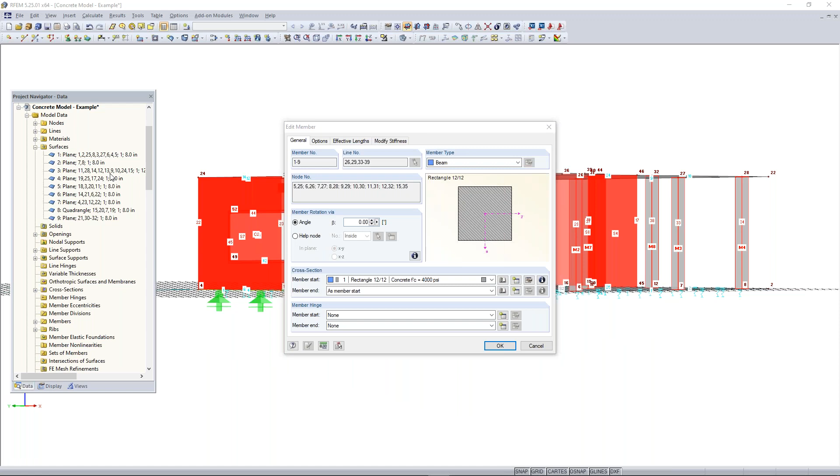We can right click on any of these elements and edit our members. We have 9 columns here, so we'll edit them. This is how we can modify the stiffness of our members, under the edit member dialog box, going to modify stiffness.

For the definition type, you can either modify your stiffness using your own user-defined multiplication factors, or modify it according to standards. We have the Canadian code and also the American code for steel and concrete. We'll choose the ACI, then make the component type columns, and the multiplication factors are automatically taken from the standard for columns. We click OK, and then do the same thing for our walls.

We'll go to surfaces and edit, then change the stiffness by going to the modify stiffness tab, change this to the ACI, and set this to walls uncracked.

And then we can do the same thing for our plates and slabs. So we can select both our bottom plates here and then also our ceiling slab, right click on them, edit surface, and then we can change our stiffness here to something like according to the ACI, and we want to set this to flat plates and flat slabs.

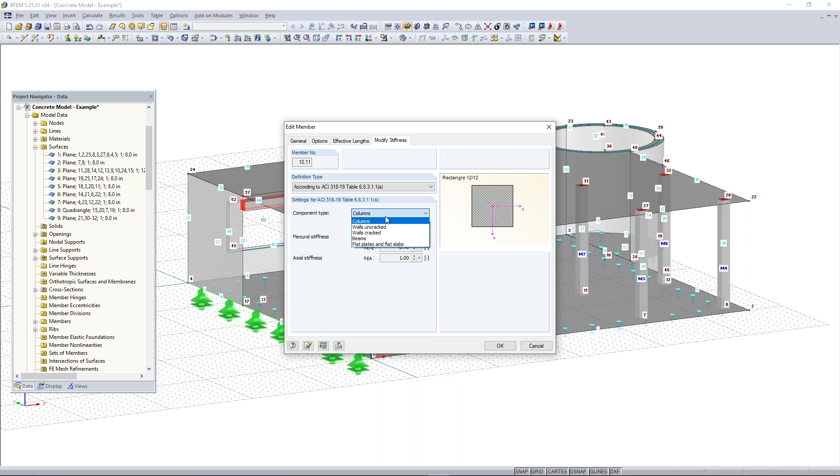And then the last thing we would need to modify is the beam here. So we can hold Control and select both of those, go to edit member, and then we can modify the stiffness of the beam here. So it will be according again to the ACI, and then this will be for beams.

So now we have all of our stiffnesses modified, and the next thing we would need to do is run through the loading. But it looks like we're running a little out of time, so we only have a couple minutes left. So what I can do real quick is just create a new load case that just involves self-weight instead of adding any loading, and we can quickly see what the results would look like for this model. So I'll just create that real quick, and we'll just run the model based off of self-weight.

So this will run and shouldn't take too long since we don't have a lot of loading. So this is basically what the results look like.

So right now we're just looking at the deformations, and if we turn this into a wireframe view, we can kind of see those better, and we can see those surface deformations, and then we can go through our results for this, and we could design this model, the concrete slabs and columns and beams in our concrete add-on modules.

So this is what the results for that would look like. And then we can also see the factors for deformation. So you can see deformations are very low, only at 0.1 inches for maximum deflection.

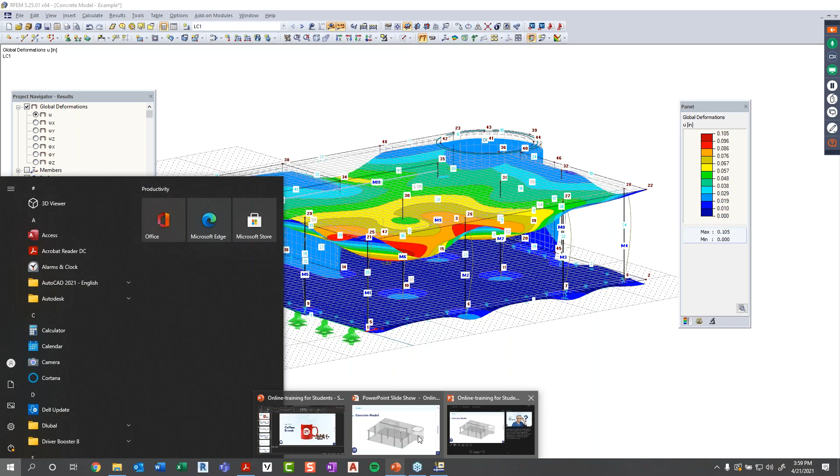And so we can go back to the PowerPoint, and then that basically takes us to the end. So are there any more questions that anyone has, anyone would like to ask before we end the presentation today?